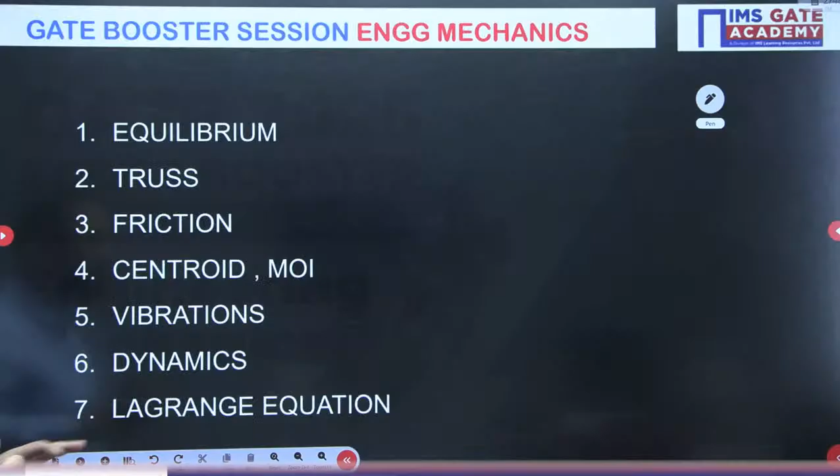Okay, we'll first look at the topics that we are going to cover here. If you see the syllabus, we have the equilibrium topic, then truss, friction, centroid and moment of inertia. Then we have vibration. Vibration is there in the civil engineering mechanics syllabus. It is there in mechanical as a different topic in the theory of machines subject, not in engineering mechanics subject. This vibration comes in civil engineering. But for mechanical students, we will already discuss it in theory of machines as well. Then dynamics and Lagrange equation.

So if I talk about civil engineering first, vibration is the most important topic, as well as the truss and friction part. Truss, friction and then vibration. Last year, if you see the questions coming from vibration, these were very good problems they asked. So if you have basic fundamental knowledge of the vibration topic, and if you have attended the class lecture live, online or offline, you will be able to solve all those vibration problems in the engineering mechanics civil engineering syllabus.

Now coming to the mechanical part, dynamics is very important, and you will see maximum questions coming from the dynamics part. But the problem is many students fail to understand which formula or relation they need to apply in the problem. So please understand, in engineering mechanics the very important part is to understand the question, to understand what kind of motion is happening. If you have understood the motion, then you can apply the equations associated with that particular motion, and you will get whatever unknown they are asking in the question. All the answers you will be able to solve.

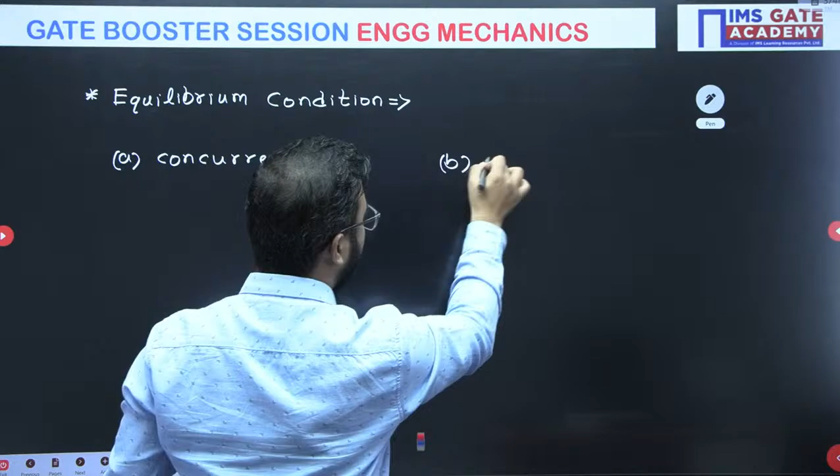So for concurrent force system - there is part A, concurrent force system, and the second part is non-concurrent force system. In concurrent force system, we have only two conditions or two equations of equilibrium. First of all, what is concurrent force system? It means the point of application of all the forces is the same. Whereas in non-concurrent force system, the point of application of all the forces is not the same. So in this case, we need to understand what kind of equations we need to apply.

So if you write here the equations: summation of forces along x direction equals 0, summation of forces along y direction equals 0 - these are the two equations. We will see the numerical for it, okay?

But before using this equation, you need to understand the force system acting on the system. If you have understood the force system is concurrent, we will use these equations of equilibrium. If the force system is non-concurrent, which means the point of application is different, we'll be using the non-concurrent force system equilibrium conditions, which is summation Fx equals 0.

First two equations are actually the same. Summation Fx equals 0, summation Fy equals 0, and summation of moment equals 0. These are the three equations we will be having.

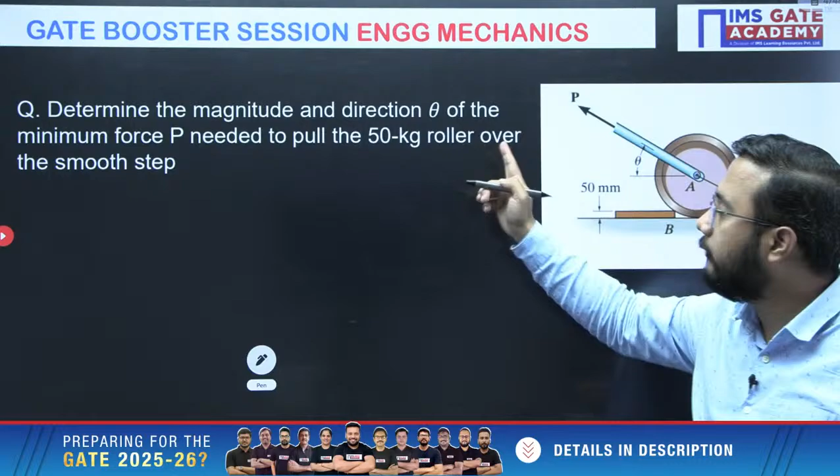This is the first problem, okay? Now what they are asking - determine the magnitude and direction. Direction means the theta value they are asking - of the minimum force P needed to pull a 50 kg roller over the smooth step. This 50 mm step is there. What is the minimum value and that direction? Direction means this theta value they are asking - what will be that theta?

Now please everyone try to solve this question and tell me your answers. I will give you 3 minutes for this particular question, and that 3 minutes is actually more than sufficient to solve this question. So you have to be very quick in solving these questions.

Everyone please try. Everyone should try this question, and please let me know your answers in the chat box. Okay, everyone should try this particular question. You might have solved such kind of questions also in your classes, so I don't think you will find it difficult to solve such questions.

The problem is theta - how to calculate that theta. For that, there is a very important concept of moment also needed to solve this particular question. So everyone please give it a try to solve this question, and please mention your answer in the chat box.

So 2 minutes left now. Just think about it, they have mentioned the minimum force P. When will the force be minimum?

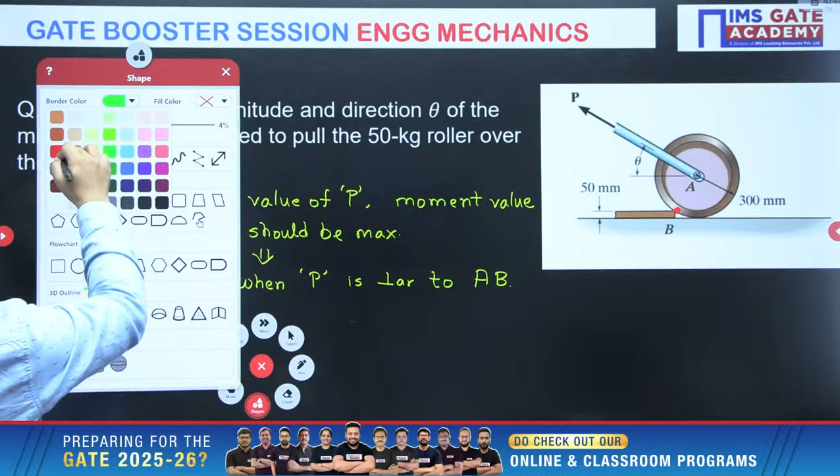Try to understand when it can have a maximum moment. When P is perpendicular to AB. AB means that distance, AB distance. Let me just draw the AB distance here for your reference, this AB distance. If P is perpendicular to AB, then only it will have a maximum moment.

Please understand, this is a very important concept here. So for having a minimum value of P, it should have a maximum moment. The moment value at B should be maximum. When will it be possible? When P is perpendicular to AB. Now we got this information that P is perpendicular to AB.

Now what do we need to do? We need to calculate the angle actually. So this is one of the dimensions. Now how to calculate this one? Please understand, very important part. First of all, let me just mark it here.

This angle is 90 degrees, right? This is horizontal, this is vertical. Let's suppose this angle is theta. This remaining angle will be 90 minus theta. Now this P is already perpendicular to AB, so this angle will be what? Theta only. I hope you are getting this point. Very important: this value is theta and this value is also theta.

Now how to get this value theta? If I am able to calculate this theta, anyhow it is equal to this theta only. So how can you calculate this part? So what we have discussed, this theta we have to calculate, and this theta is nothing but this theta only. So this theta, how can I calculate? Everyone please try to understand here.

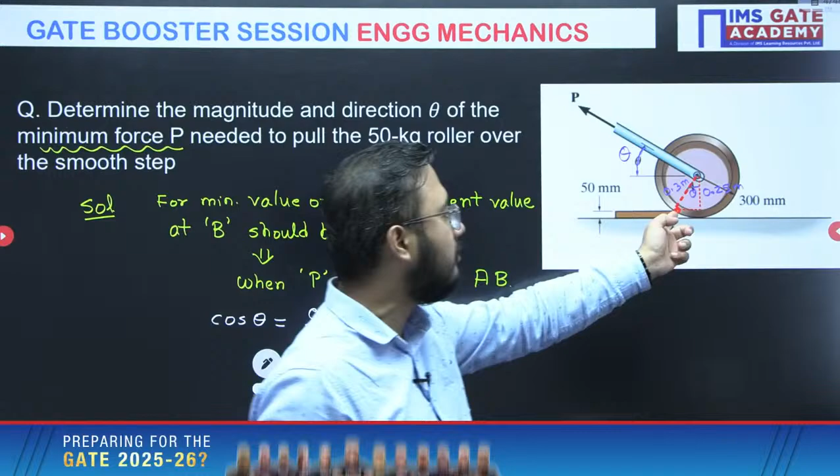This is the first part of the question. If I have solved theta value, then we can easily get the value of P as well by taking the moment at B as 0. Now, why can we take moment at B?

Because we are writing moment at B for a situation, for a moment when it is just about to roll. Just about to roll means it is on the verge of rolling. It is not actually rolling, it will be on the verge of rolling, right?

So theta value we can calculate, and once we have calculated theta, what we need to do is take the summation of moment at point B as 0. With this equation, we will get the P value as well.

How will we write the moment at B? Because of P, let us write P minimum multiplied by how much distance? 0.3, because P is perpendicular to AB distance, directly I can write. Okay, fine, P into 0.3.

Another moment will be created by the weight. This is P, the other value will be weight. Now, P is creating anti-clockwise and W will create clockwise. So clockwise and anti-clockwise moments I will consider equal for equilibrium condition.

50 kg roller they have given, so 50 into 9.81, that is weight, multiplied by this distance, because the line of action of the weight force matters.

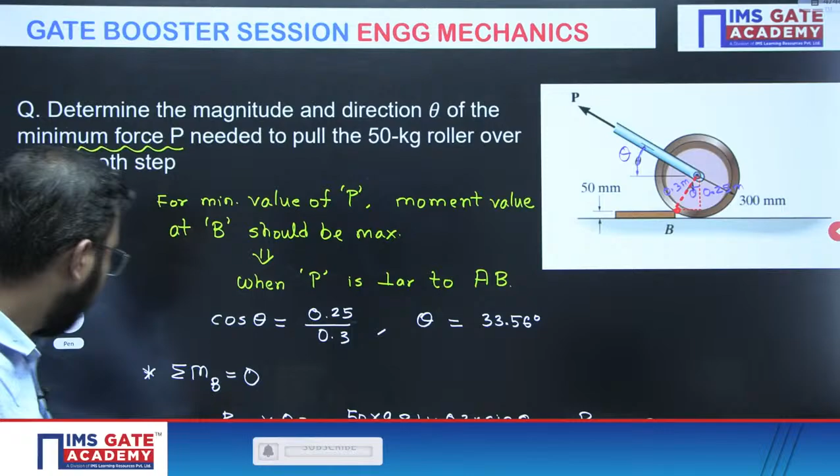Now how to solve such problems? There is a very important concept that everyone should understand. So before coming to this numerical, I will tell you one important concept here.

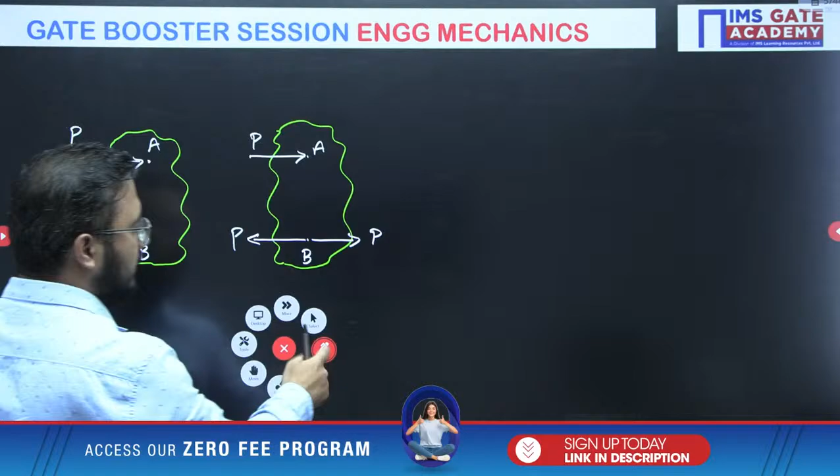But one thing you will observe: this force P and this force P will form a couple. Same magnitude, both parallel, there will be some distance between them, acting in opposite direction, so couple formation will be there.

Now see, if I remove that couple and show the couple magnitude directly here, this is force P at point B. Couple direction would be clockwise, and that couple moment value will be P into D, assuming the distance between them is D.

So what we have understood here is, if I have to transfer a force to another point, not only the force will come, but also a moment or couple value will come. Couple value means nothing but the moment. So if I transfer this force, not only the P force comes, but also that moment.

This is a very important concept. This force couple system is the equivalent force couple system of this force. Equivalent of this force system is this force couple system, and equivalent of the force couple system is this force. Vice versa, we can say.

So this condition and this condition are equivalent. Now, using this concept, we can solve this problem easily. Please understand, this is a very, very important concept.

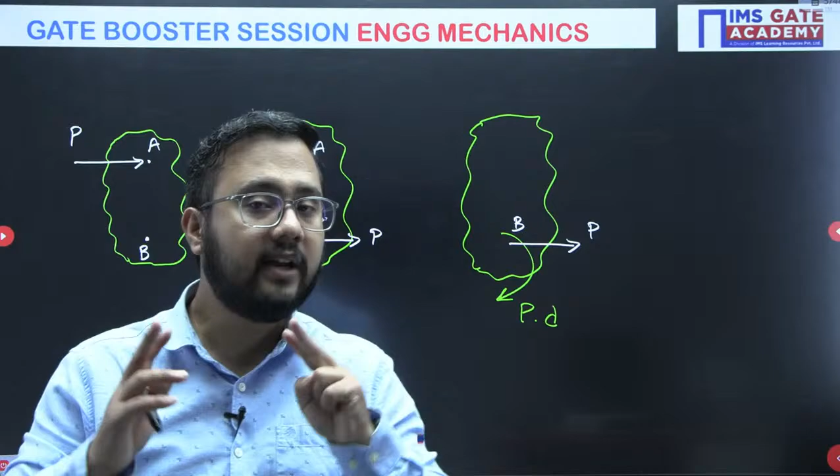This is a very important point. While transferring to point B, magnitude and direction are same, only point of application is different. Now, this particular problem, we can easily solve if you have understood this concept.

Now, everyone please try this particular problem and let me know your answers, everyone, fast. I will give you just 2 minutes, because this is a very easy problem. If you have not understood the concept, it would be difficult, but if you have understood it now, it is very easy.

You have to identify systems 1, 2, 3 and 4. Which system will give you the correct representation of the equivalent force system at point A? Out of the 4 options, which system is the correct representation of the equivalent force system at point A? So, 4 options are available. Please let me know your answers, everyone.

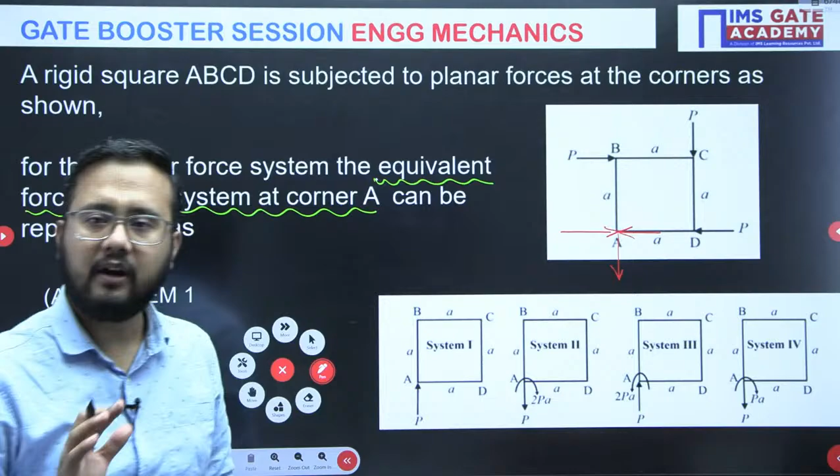Now, while transferring the forces, the moment value will also come. This P at point A will create a moment P into A, in clockwise direction. This other P at point A will also create a moment P into A, again in clockwise direction. So P into A plus P into A, that is the moment value at point A.

Now talking about the forces, this one and this one will get cancelled out. Only force will be the downward force, but the moment value is 2Pa, not Pa, Avinash. That's why you got D as the answer. D would be correct, but the problem is the moment value is wrong there.

So the correct option is system B basically, system second. System second is correct because the moment value is 2Pa and the net force value is P in the downward direction. Option B, which is system second, is the correct answer. I hope it's clear to you, Avinash, why option second is correct here. Option B is the correct answer, that is system number 2.

So no need to confuse here. Simply transfer this force, this force transferred like this, this force transferred like this, this force transferred like this, maintaining the magnitude and direction. This P cancels out, remaining P in the downward direction. This P and this P together at point A create a moment Pa plus Pa, that is 2 into Pa. So that's why option B is the correct answer here. Clear? Avinash says yes.

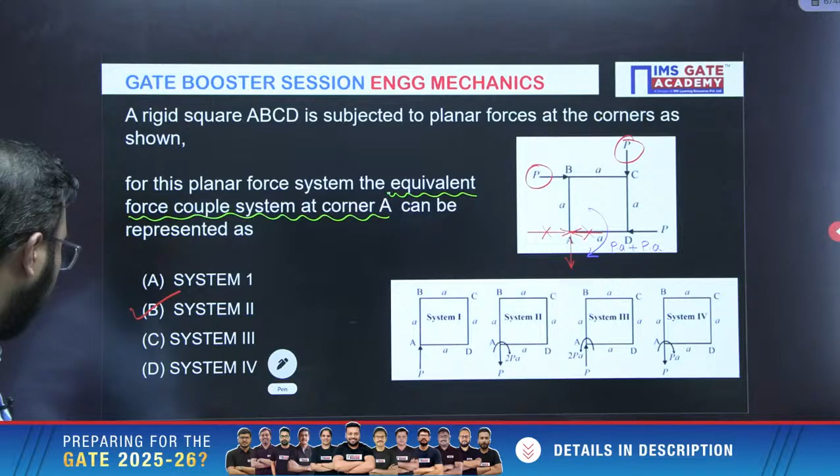Great, now coming to the next part, very important. So these are the questions we discussed from equilibrium. Now we'll move to the truss analysis part. In truss analysis, both in mechanical as well as civil, you will always find a question on zero force member. Always they ask a question about the zero force member. So we'll discuss the zero force member concept, and after that you need to tell me the answer for a zero force question.

Just a small concept, 2 cases are there. If you have understood those 2 cases, then you can easily get the answer, and we'll see how fast you are able to get it. So for the zero force concept, there are 2 cases, like case number 1.

In case number 1, what will happen? There is a joint formed by 2 members, member 1 and member 2. Let's suppose they have an angle theta between them. Remember, a joint formed by 2 members, and both are non-collinear. So what will happen? Force in member 1 and force in member 2, both are 0. What is the condition? Please remember this condition.

Condition is no load at joint and no support reaction at joint. If this condition is satisfied, then only I can say force in member 1 and 2 is zero.

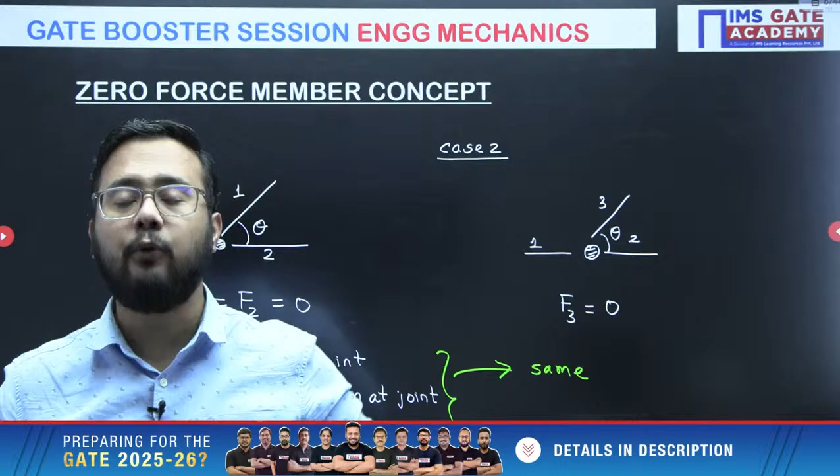And even if a question is not specifically about zero force members, that concept is still very helpful in analyzing a truss problem. Because let's suppose there is a very big, complex truss given. But in that complex truss, there are a few members which are zero force members. If you are able to identify those members, the analysis becomes much simpler. Otherwise, you will always get confused.

You might even get fear - okay, a big complex truss is given, how do I solve this? It would seem difficult. But no, it's not like that. In that big complex truss, you might find some zero force members. If you identify those zero force members, the whole analysis becomes very, very easy.

So always make sure it's not only in zero force member questions, where they ask you to calculate the number of zero force members, that this is required. No - in a simple truss analysis problem where they are asking for force in any member, this concept is also very helpful. Now let us see the problem.

A very, very good problem they have asked. Okay, so let everyone try. I will give you 3 minutes for this problem because it's really a very good problem - not that easy, but still if you try, you will get the answer. I will give you 3 minutes. Everyone please try and let me know your answer in the chat box. Avinash, you can try and please mention your answer in the chat box.

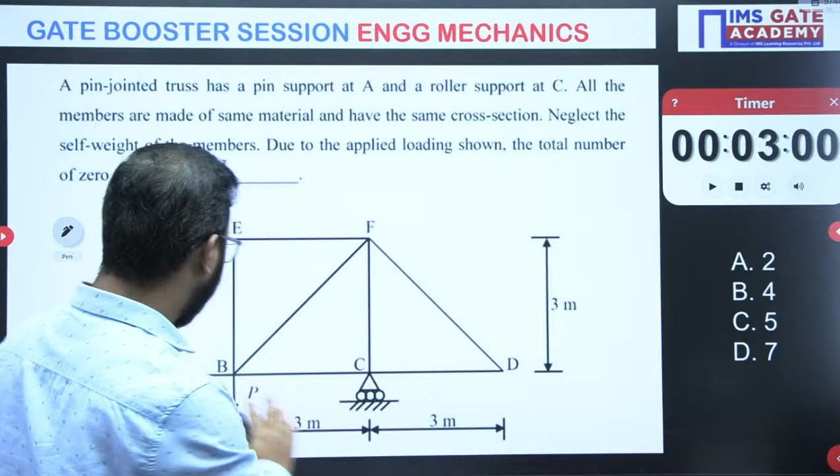Do one thing, take the moment about A. Let us write it here itself. Summation of moment at A equals zero. At C, assume there is a reaction RC. RC will have a moment about point A in the anti-clockwise direction, how much? RC into 6.

It is anti-clockwise, so minus. This P is clockwise, P into 3, so plus. The sign is up to you, whichever convention you follow: clockwise positive and anti-clockwise negative, or anti-clockwise positive and clockwise negative. So RC at A is anti-clockwise, I've used minus, RC into 6. Now P into 3, this P will have an anti-clockwise moment, so it will be minus P into 3 equals zero.

Now P into 3 plus minus, what is the RC value then? The answer is 0. RC value is coming as 0. D, yes Avinash, absolutely, option D is correct, 7 is the correct answer here. But you will get to know that 7 is the answer only if you have calculated the RC value. If you have not calculated RC value, you will never get 7 as the answer. This RC value is 0.

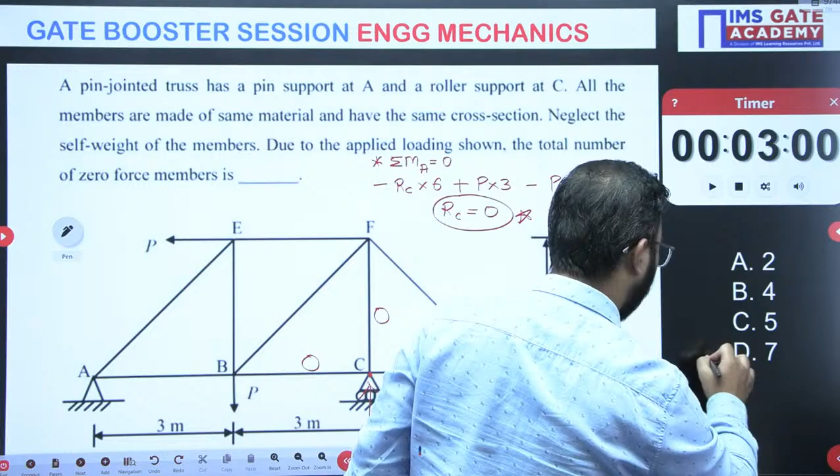Now please look at joint F also. Sometimes whenever you have confusion, please draw the diagram, then it would be very easy to understand. You should draw the free body diagram of joint F. Let me draw it here itself. So this is joint F, right? This is one member, this is another member. I have not mentioned members FC and FD because they are already 0. So this is the 2 members. Now please understand, very important part.

FC is 0, right? Is there any member? Because this is an inclined one, it will have horizontal and vertical components. But is there any vertical force or vertical member to balance the vertical component of this inclined member? There is no one present to balance the vertical component. Which inclined member am I talking about? FB. There is no one to balance it, so that inclined member has to be 0. If it is 0, then obviously this horizontal member will also be 0. So sometimes directly looking at the diagram you won't get an idea; better always draw the free body diagram. So this is 0, this is 0.

How many have we counted just now? 1, 2, 3, 4, 5, 6. 6 is not there, where is the 7th one? Can you tell me the 7th zero force member? Which member is the 7th zero force member? I have mentioned only 6 zero force members. Where is the 7th? What is your answer, Avinash, tell me. The 7th zero force member. So counting wise it is totally 6, right? Anyone? We have identified 6, but the answer is 7, so where is the 7th one? Yes, absolutely correct.

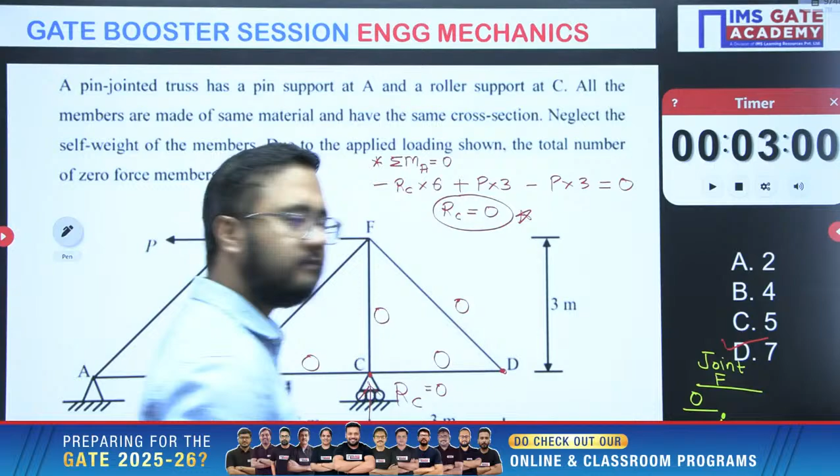Clear? So such kind of questions you can expect in the GATE examination as well, for both civil and mechanical engineering. This is a very important concept of zero force member. Now we'll see another problem, again a very important one. We have to calculate the force in member HG. Which method will you use? Obviously method of section. In truss analysis, method of section is one of the best, simplest, and easiest methods, and it takes very less time.

So please try to calculate the force in member HG, and your time starts now. Do it fast everyone, HG.

Use method of section. You have to use the method of section. For method of section, what is the first step? We will cut a truss with a section, and that section should pass through a member like HG, because that is the unknown member. Our section should pass through HG member. So I can use a section which is going to cut the truss like this. So this is the hint, this section we have to use.

Either you can use the left part of a truss or right part of a truss. It's up to you, whichever part you are comfortable with and which part you think is easy to solve. So that section we can use, two parts, left or right, it's up to you. Please do it, last 2 minutes you have. Do it fast and tell me your answers in the chat box.

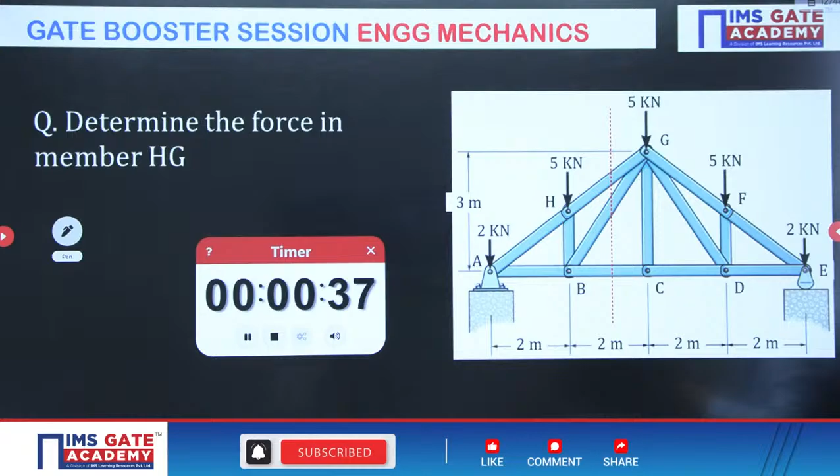Last 1 minute. Ten seconds left, everyone.

Time up. Anyone got the answer? So I think no one got the answer here. You might think it is a difficult one. See, truss problems, I'm telling you, you will always get full marks if you have a basic understanding of the force analysis part and some basic understanding of geometry as well.

Now, already I've cut a section here. That section we are going to use. But before that, I need to calculate the support reaction Ra, this is Re. How to calculate the support reactions? See, equilibrium of entire truss we will be assuming.

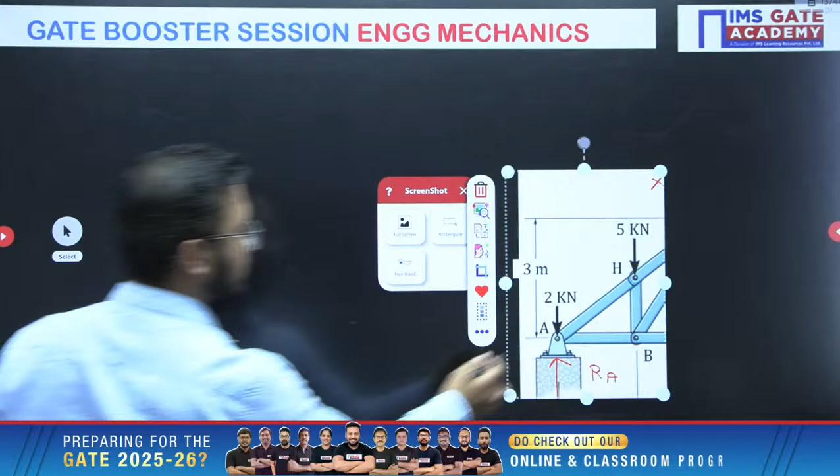Now let us mention it here, very important. This is force in member HG. This is force in member... what is this member? BG. And this is force in member BC. Is it clear? How we have mentioned the left part of a given truss.

We have used a section, cut a truss, and we have used the left part for analysis. Now, as it is a non-concurrent force system, we have only 3 options, like 3 equations of equilibrium. I hope you remember those equations we just now have written.

These are the 3 equations of equilibrium I am having.

Now, obviously if I use summation fx, I cannot use it because HG, BG and BC are the 3 unknowns. With one equation and 3 unknowns we cannot solve. Summation of forces vertical again we cannot use because Bg will be there, Hg will be there.

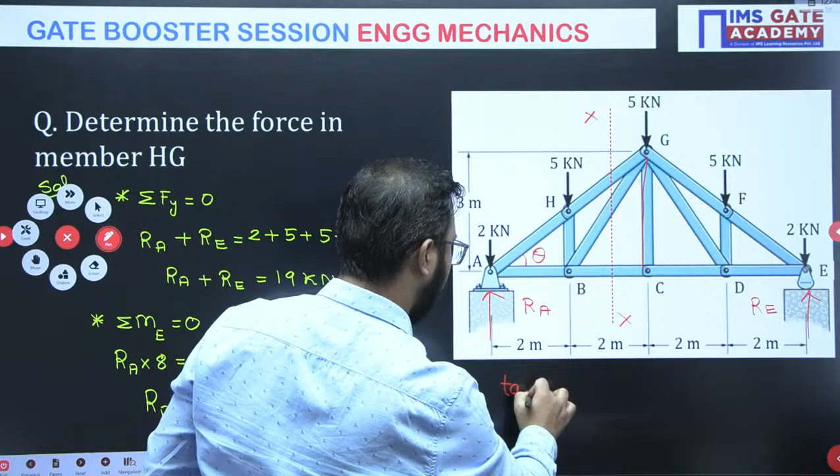That theta I can use here to get FHG cos theta. So how will I write the equation? First of all, tan theta: perpendicular is 3, base is 4.

Now everyone please see here. I am writing the moment about point B equal to 0. So the first 2 kilonewton, this 2 kilonewton, and this FHG will be having a moment value at B only. There is no other force which will have a moment. BG and BC are passing through B only, so how can they have a moment?

So we'll write this value first: 2 multiplied by distance 2, having anti-clockwise moment. RA will have a clockwise moment, so RA value is 9.5 into 2. And what about HG? It is having anti-clockwise moment, so we write minus FHG cos theta multiplied by the distance: total was 3, half will be 1.5.

Equals to 0. So this is the equation I am going to use, and from here I will get the answer for FHG.

So please first calculate the theta value, and that theta we will utilize in this equation to get the answer of FHG. Do it fast everyone.

Okay, the theta value is coming around 36.87. Theta value is 36.87 degrees. You can please cross check the answer, 36.87 degrees.

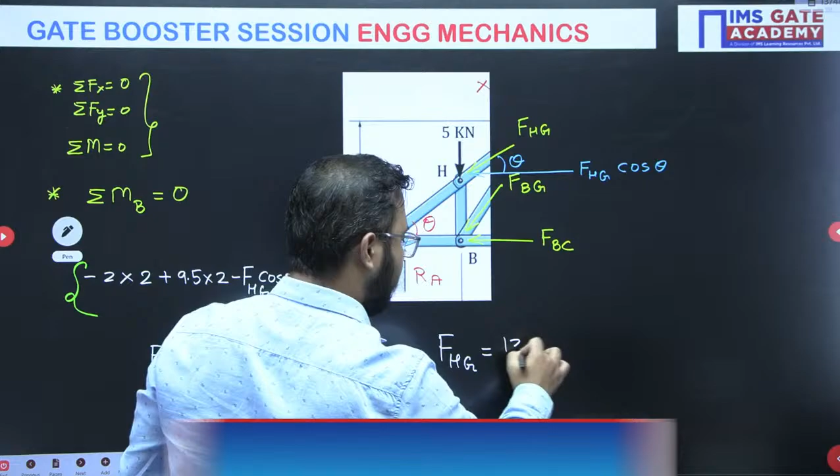I hope everyone has understood the theta value and how we have used it. We calculated the support reactions first, and then FHG's horizontal component creates a moment at B, not the vertical component. So FHG cos theta multiplied by the distance 1.5. The answer is approximately 12.5 kilonewton. Please everyone cross check this answer.

12.5 kilonewton is the correct answer for this particular question. Right everyone? Is it clear? Any confusion in any of the equations that we have used here?

So you can ask. This is again a truss analysis question, if you have understood the process, how we have to use method of section, how we will cut the truss, which equations we have to use. We have only 3 options.

One by one try all three. Okay, if summation fx is not giving answer, summation fy is not giving answer, summation of moment will give the answer. But while using summation of moment equals 0, you have to be very careful and very much clear about the point about which you have to write this equation.

It means I will select a point in such a way that other unknowns will not come into that equation. And when it will not come into that equation of moment, when they have a 0 moment about that point. So that's why intentionally I have selected B, because BG and BC moments are 0.

Otherwise, if I select point A, there will be a moment of BG and that will create a problem for me. Otherwise, how will I get the answer? So with a single equation, only one unknown you can solve. It is not possible to get the answer of more than one unknown in a single equation.

Is it clear, everyone? Great. Now moving on to the next numerical here, and that is from the friction chapter.

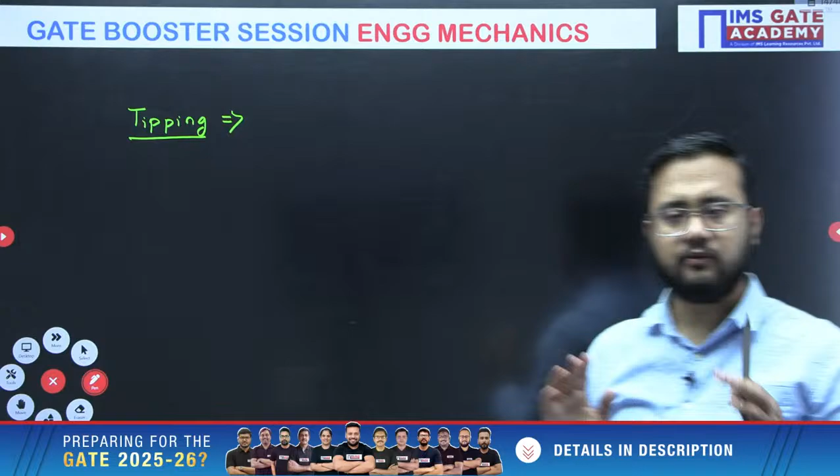So that was a very good question. You can just refer to the previous year booklet that you are having, and you will get the detailed solution there. Now, the tipping case - let us understand that tipping case here first.

Let's suppose this is the block we are having. So consider this point that I am applying a force P here. Now obviously, if I am applying a force P, there will be a tendency of the body to rotate about this point. Obviously at this corner itself, it will have a tendency to rotate.

Now it will rotate or not, that we have to understand. Under what condition it is not going to rotate, or what is the limiting condition when it will be just about to rotate or just about to tip about this corner, that we need to understand. So that limiting condition means what?

When the normal shifts to this corner - friction, so like it will be tangential, but when normal shifts to this corner, then we will call it a limiting condition. This is the limiting condition of tipping.

And what will happen in this limiting condition? The body will be just about to tip, just about to tip - on the verge of tipping, like this. So that is the limiting condition.

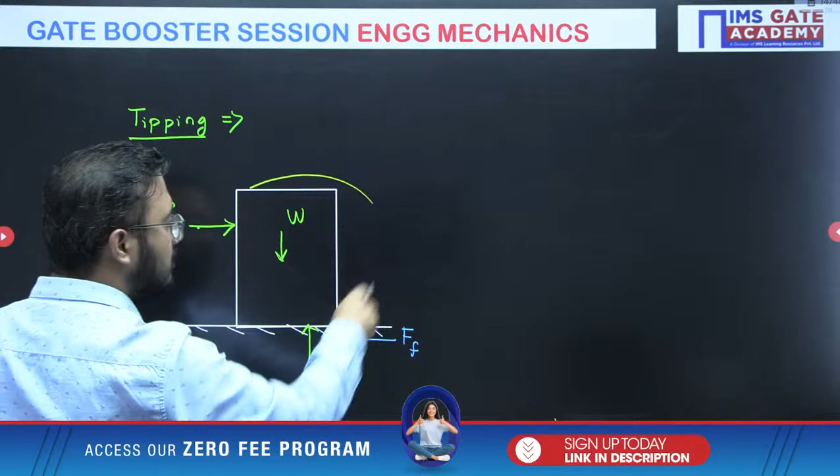This P and the friction force create a clockwise couple formation. That weight and normal will create an anti-clockwise couple formation. So that anti-clockwise couple formation from W and N is trying to oppose the tipping, but this P and friction force couple is trying to induce the tipping effect.

P and F couple formation is the reason for the tipping, but W and N couple formation tries to oppose that tipping. That's why in the limiting case, how far can it move? It can reach up to the corner only. It cannot go beyond this point. That is a very basic common point.

So what is the limiting condition? It can reach to this corner. It cannot go beyond this corner point, right? That's why the limiting condition means when the normal shifts to the corner about which the tipping is going to take place. I hope you have understood this point. This is very important.

Now coming to this question, everyone please understand. They are asking what the maximum value of height is so that it will slide without tipping. Now first of all, we need to understand the value of force for which sliding will take place.

We need to understand the force value for which sliding is going to take place. So summation of forces along the inclined plane we will take as 0. Now along the inclined plane, the very important part is to draw the free body diagram.

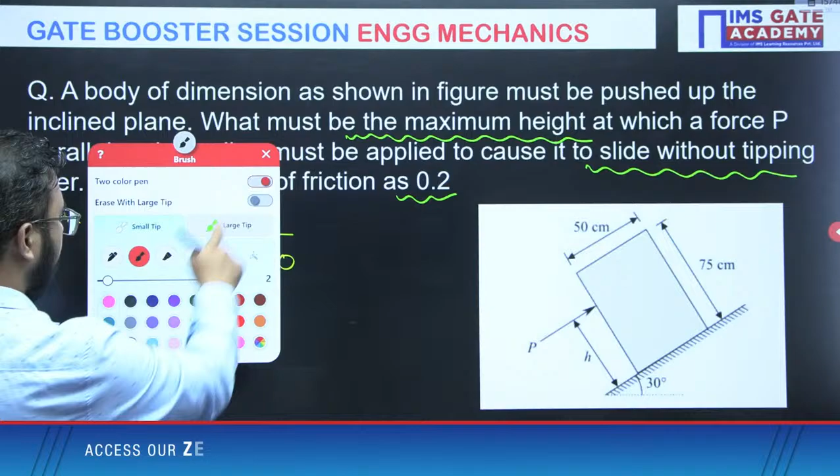The dimensions are already clear: this is 50, this is 75. Now, as I have used summation of forces along the inclined plane, so summation of forces along the inclined plane I am going to write: P minus friction force minus W sin 30.

So the P value you will have: friction force plus W sin 30. So the friction force, how do you write it? Mu into N, plus W sin 30. This is the value of P.

Now please understand, this is very very important. Tipping case, the limiting condition, maximum value of height they are asking - at what maximum height can we have so that tipping can be avoided and it can slide without tipping. Maximum height they are asking.

So maximum height basically corresponds to the situation on the verge of tipping. That's why I have assumed the limiting condition. Because as the height increases, the moment value increases here. As the height of P from this base increases, the moment value increases, and the tendency of rotation also increases with the moment value. That's why they are asking maximum height.

So we will be considering the limiting case. Now what I will do is take the moment values directly here as 0. So let us write here: summation of moment. Let us write this point as A, this is B.

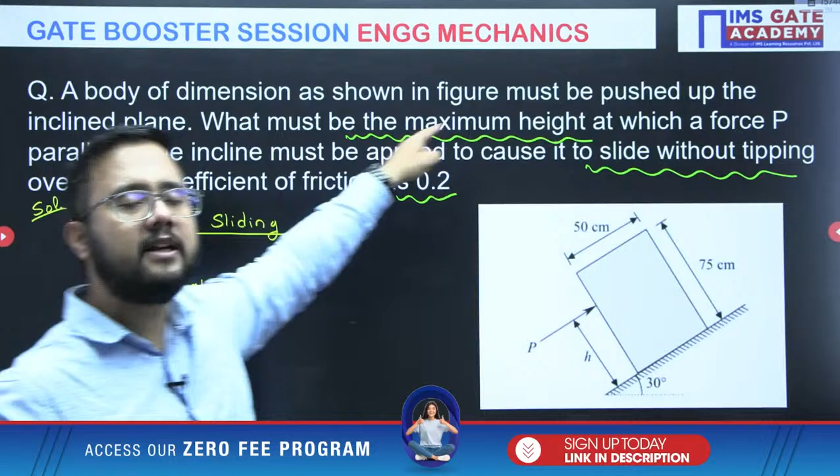Limiting condition means when the body is just about to tip or on the verge of tipping. I will understand they are talking about limiting condition because they have mentioned maximum height. What is the maximum height when tipping will not take place? So I will consider that height which will induce the tipping motion, or which will create a condition where it is on the verge of tipping. That height will only be called the maximum height, because as soon as I increase the height, the moment value will be more and it will tip for sure. It will tip.

So two types of questions they will be asking: what is the maximum height, or what is the minimum value of force? Because when they are asking the maximum height, P value will be fixed and H is variable. But if they are asking the value of force, then height will be fixed. So please understand, either they will ask maximum height, or they will ask minimum value of force P so that it can slide without tipping. That is the second type of question that can be asked from tipping.

Tipping is very important both in mechanical as well as civil. Already in mechanical it came a few years back, but in civil, recently, a very good MSQ they have asked. And that is very important, so please try to solve that PYQ also.

So if you solve all these values here, the H value you will be getting is approximately 60 centimeters as the answer. So you can cross check this answer as well, approximately 60 centimeters you will be getting as the answer here. Please confirm everyone, is it right? Everyone has done it? So 0.2 into W cos 30 plus W sin 30, into H, equals W cos 30 into 25 and W sin 30 into 37.5.

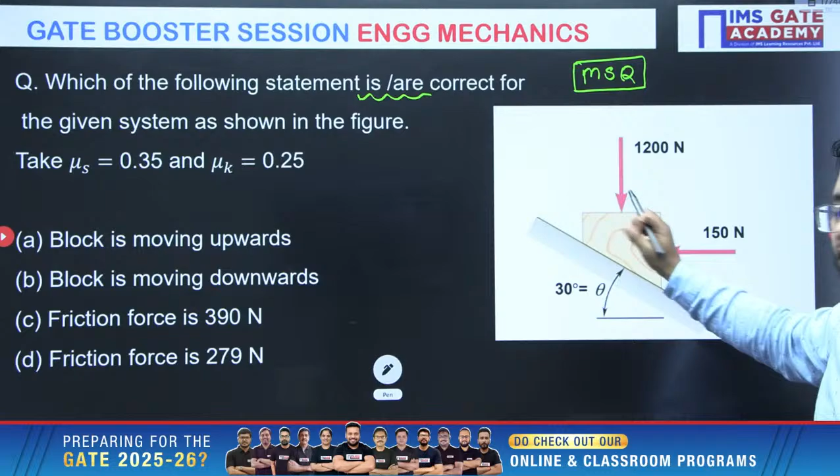Coefficient of friction - static and kinetic. There is a 1200 Newton force in the vertical direction downward, and 150 Newton in the horizontal direction towards the left. There are four options mentioned, and we have to see which options are correct: block moving upward, block moving downward, and two friction force values - 390 or 279.

Okay, fine. I need to analyze this particular system. To analyze the system, first of all, I need to understand where it has a tendency of motion. Where is the tendency of motion? How will we identify that?

Understand this basic point: obviously this block will have a tendency to move along the inclined plane itself - it will try to move in the inclined plane. So I need to know whether it is trying to move upward or downward. How to decide? I need to calculate the net value of the force on the block along the inclined plane, and then only I can understand. If the net force is acting downward, it will move downward; if the net force value is in the upward direction, it will move upward.

So that is the first thing, because the tendency of motion is required so that I can understand the direction of friction force. Clear, everyone? So let us mention the directions here. Better I will draw the free body diagram, and then it would be easy for you to understand also. So this is the body we are having, and along the inclined plane, this is the direction.

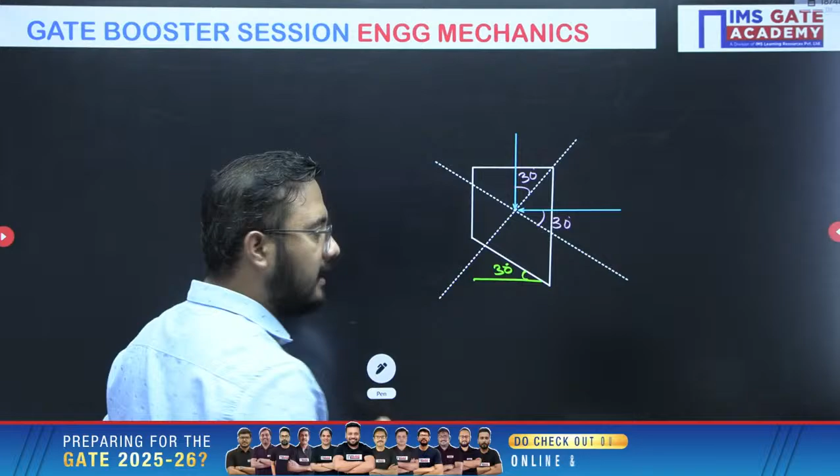Because the inclination is 30 degrees, obviously this one will also be 30 degrees. The inclination of this inclined plane from the horizontal is 30 degrees, so this one is also 30 degrees. Okay, fine, this is clear. And one more thing - this is the perpendicular direction, perpendicular to the inclined plane. Perpendicular to the inclined plane and vertical direction always have theta, that is the inclination angle. So this angle is also theta, 30 degrees. This one also is 30 degrees. Like that we have identified the angles as well.

Correct? Now this was 150 Newton and this was 1200 Newton. Now let us take the components along the inclined plane. So this is 150 cos 30. This will be 1200 cos 30, but this one is 1200 sin 30, and its perpendicular component here, perpendicular to the inclined plane, plus I should write 150 sin 30. Okay, like this - so we have mentioned the forces as well.

Fine, now where will be the tendency of motion? Obviously I can say 1200 sin 30 is 600, and that value will be more than 150 cos 30. So it has a tendency to move in the downward direction. So we can write here: 1200 sin 30 is greater than 150 cos 30. So the block will have a tendency to move downward.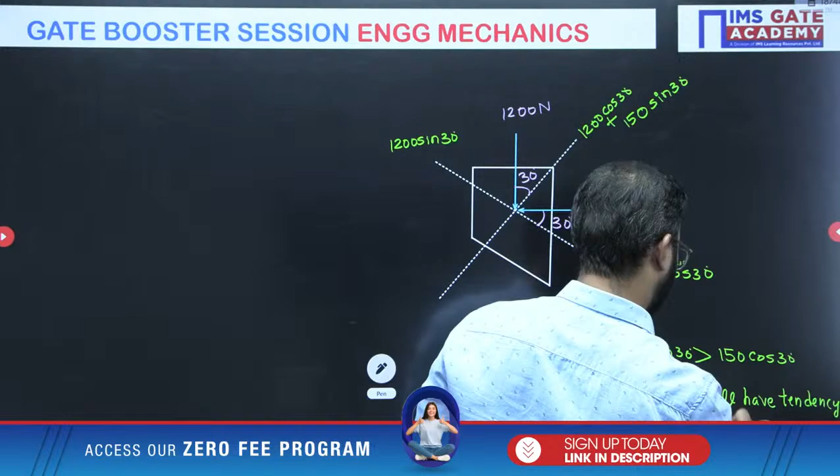Tendency to move downward. So block will have tendency to move downward because 1200 sin 30 is downward, greater compared to 150 cos 30.

Now the friction force. Let us mention the friction force values. This is the friction force that will act upward, and that is the normal force. Friction force upward because the tendency was in the downward direction. So friction force will oppose that tendency and the normal force is there. Is it clear everyone? Correct?

Now, what I will do, I will calculate the value of friction force required so that it will remain in static condition. I am assuming this because if you see the options, they are saying moving upward or downward, or the friction force - what will happen? It will remain stationary or it will move upward or downward, I don't know. I will assume the body to be under equilibrium condition.

Body to be under equilibrium condition, and for having that equilibrium condition, what is the friction force value required? So required value of friction force I will calculate. So I am writing here assuming equilibrium. Assuming equilibrium condition. Please see.

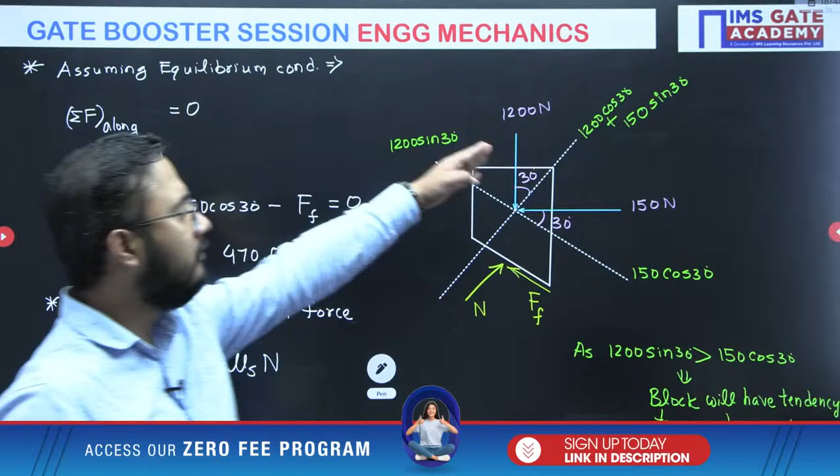Maximum possible friction force. Maximum value of friction force possible. Maximum value of friction force is nothing but mu s into n. What is n? N is 1200 cos 30 plus 150 sin 30. So summation of forces perpendicular to the inclined plane, you will take it as 0. N value will be equal to this summation only. So that we can write it here itself.

So that mu s value, what is the mu s value? In the question they have given us 0.35, into n. N value is 1200 cos 30 plus 150 sin 30. So you will get the answer of friction force. Maximum value of friction force you will be getting here. Is it clear, everyone? Maximum value of friction force you will be getting like this.

Okay, so how we got the value of n? Let us write it here itself. Summation of forces perpendicular to inclined plane. So that n equals to 1200 cos 30 plus 150 sin 30.

Okay, that value we have substituted. Maximum value of friction force you will be getting. So if you calculate the maximum value of friction force, just calculate this 1200 into cos 30 plus 150 into sin 30. That is what the value of n, then multiplied by 0.35. It is 389.98. You can consider it as approximately 390 Newton.

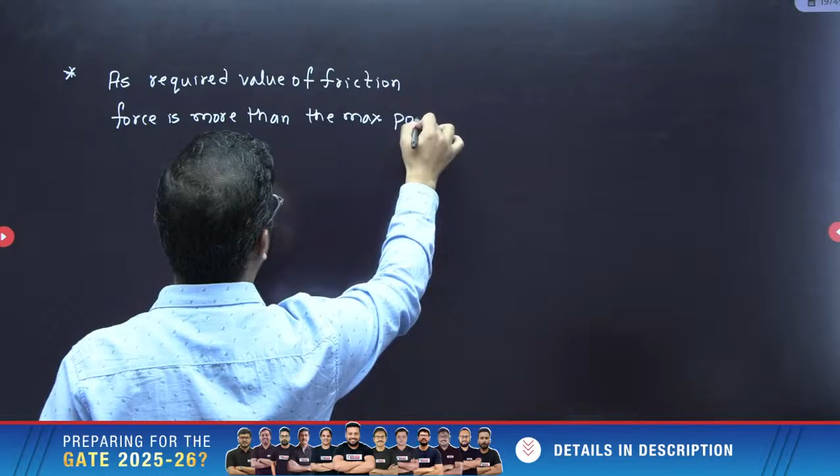As required value of friction force is more than the maximum possible value of friction force...

So as required value of friction force is more than the maximum possible friction force, the body is under dynamic condition. It cannot be under equilibrium condition. It is under dynamic condition.

And for dynamic condition, friction force we will call dynamic friction force, which is mu k into n. Mu k value in the question is given as 0.25, into n value. N we have already written as 1200 cos 30 plus 150 sin 30. Like this we have to write.

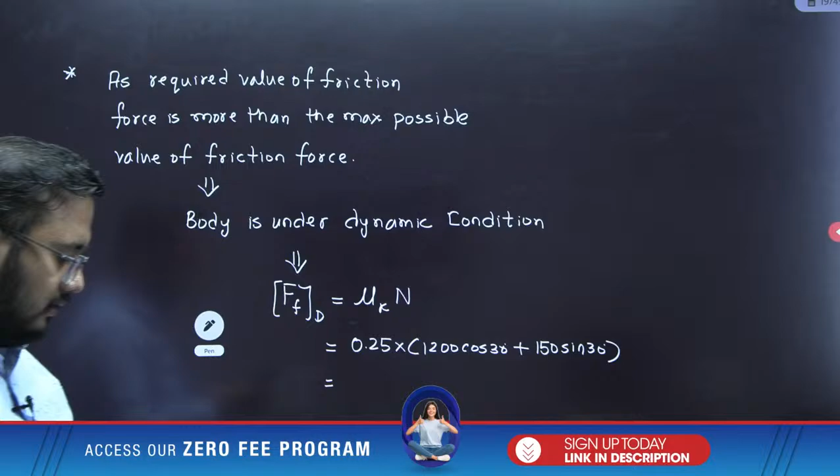So if you just calculate this, 1200 into cos 30, then we have 150 into sin 30, into 0.25 finally. So approximately 278.55 Newton is coming. So this is the actual friction force which is acting in this particular condition.

So if you look at the options here, body is moving downward. Friction force is not 390 Newton, friction is 279. Why is the friction not 390 Newton? Because that is the maximum value of friction force, it is not the actual value.

Actual value, how will we get it? First we understood it is under dynamic condition. Once it is under dynamic condition, friction force is calculated by mu k into n, not mu s into n. I hope this part is also clear to everyone.

This is a very good question they have mentioned here. Such kind of MSQs you can expect in your GATE examination as well, and they are very, very important. You will be able to solve them only if your fundamentals and basics are clear. Otherwise you will get confused whether it will move up or downward.

First understand the motion here. The body will always move along this direction. So in this direction, what is the value of net force? We have to understand whether it is upward along the incline or downward along the incline. Accordingly, I will understand the tendency of motion. Once tendency of motion is understood, the friction force direction we can easily mention, because friction force will always oppose the tendency of motion.

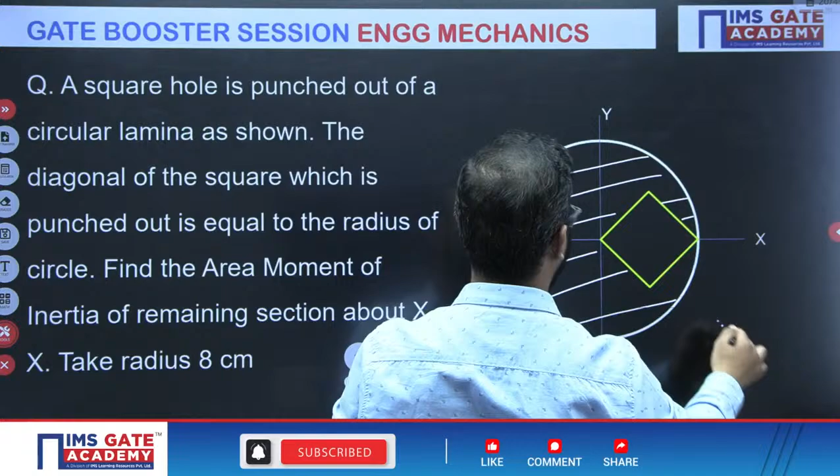Now how will we do this problem? Let us take the diagram in the next page also. Now please everyone see here how we will solve this one.

So about XX, what I will be doing first is area moment of inertia of circle minus area moment of inertia of a square section. Area moment of inertia of circle minus area moment of inertia of square, because again circle is about XX only.

About xx axis, moment of inertia equals circle moment of inertia, pi by 64 d to the power 4. What is d? Radius they have given is 8, so diameter will be 16 to the power 4, minus...

How to calculate area moment of inertia of the square about its diagonal? What I can do is calculate the area moment of inertia of this triangle and multiply by twice. So area moment of inertia of a triangle about its base, multiplied by 2, I will get the total area moment of inertia of the square about xx direction, very easily.

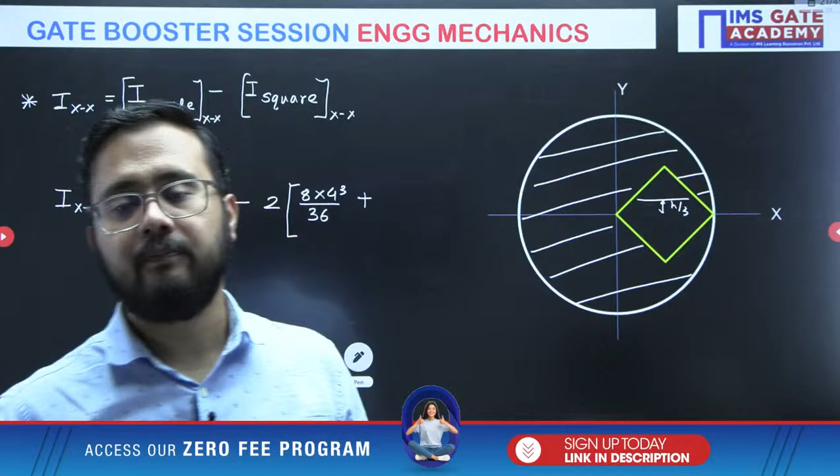Now for a triangle, BH cube, B is 8 here, H will be 4, so BH cube by 36. Actually we have to use the parallel axis theorem, because BH cube by 36 is about its centroidal axis, and the centroidal axis is h by 3 distance from the base. So we have to use the parallel axis theorem, right?

If I have to use parallel axis theorem, area of triangle will be half base into height, 8 into 4, that is area, into height 4 by 3, h by 3 from base, square like this. So using parallel axis theorem we have written this relation.

Now you can easily solve. Using parallel axis theorem, correct, you can get this answer. Just put the values, you can calculate, you will get the answer. So please let me know your answer.

Avinash, what will be the answer here? Tell me, the basic calculations you can do, no? So tell me your answer. About xx axis, what will be the answer here after solving this one?

This is basic mathematics, no? So this calculation you can perform very easily. I don't think that will be a difficult task for you. You have to be habitual of using the virtual calculator. If you are using the physical calculator, it would be very difficult for you in the GATE examination. Right now also you should use the virtual calculator, wherever and whenever you are practicing.

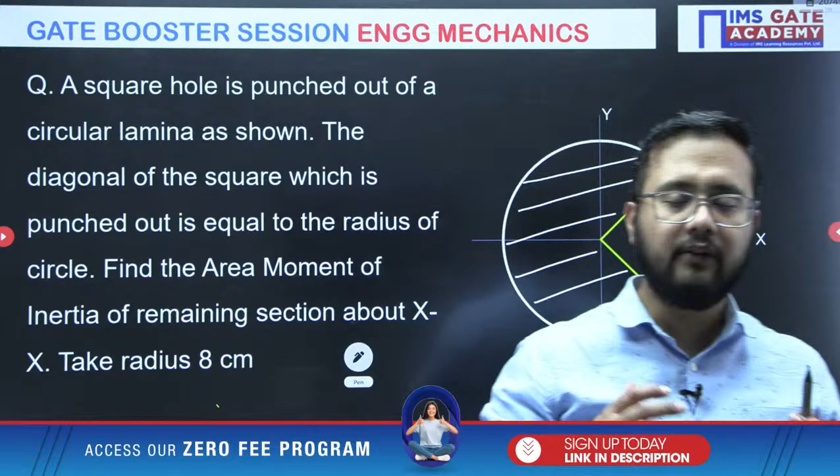Don't write the entire equation in the calculator itself. Like let's suppose this I have to calculate, don't write this part, then minus this part, plus this part, because chances of mistakes will be there. Even if one bracket is missed or something happened, the whole answer will get wrong, even if you know the concept and everything about the question.

Better thing is: calculate this part separately, calculate this part separately, calculate this part separately, and then solve. Don't take unnecessary risk of getting the wrong answer during calculation using the virtual calculator. It's my sincere advice to everyone, please understand. Better you take 10-20 seconds more in solving the question, but at least you should not get the wrong answer.

For those questions where you know everything and would get the right answer, silly calculation mistakes using the virtual calculator make you get the wrong answer, and the whole effort you put in to solve the question will go waste. That should not happen, right? So use the calculator part-wise, calculate this part and this part separately, then add all those things together.

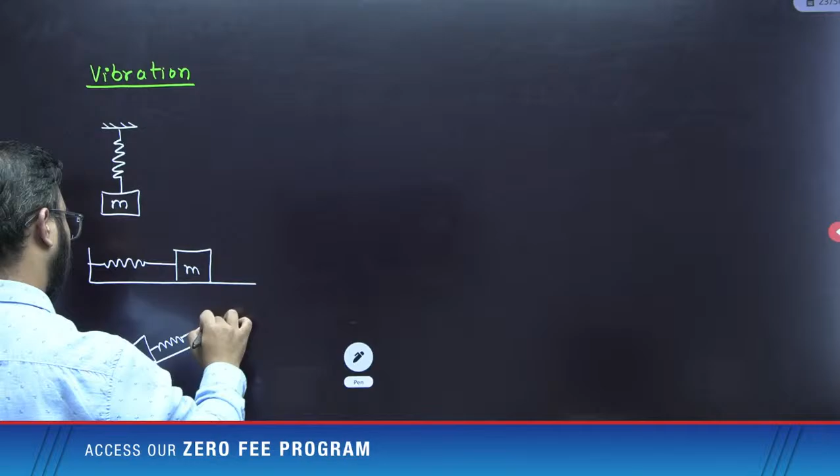Okay, in the vibration part, what you need to understand is for a spring mass system, whether this kind of spring mass system, or if it is like this, or if it is like this, in all three cases the natural frequency formula is under root k by m.

What is k? K is the equivalent stiffness, and k value has to be in Newton per meter. Mass should be in kg. Take care of this unit, otherwise sometimes they will give the value of k in kilonewton per meter, Newton per centimeter, Newton per mm, like that. You have to convert it back into SI unit, that is Newton per meter. That is omega n, unit is radian per second.

Another way of writing natural frequency is in hertz, which is omega n by 2 pi, and the unit is hertz. What do you mean by this hertz? It is the number of cycles per unit time. Number of cycles of oscillation or vibration, how many cycles of vibration or oscillation happening per unit time. That is what Fn will tell you.

And there is one more parameter, that is time period, which is 1 upon Fn, and the unit is second. So it will tell how much time will be taken to complete one cycle. Remember these things: time taken to complete one cycle.

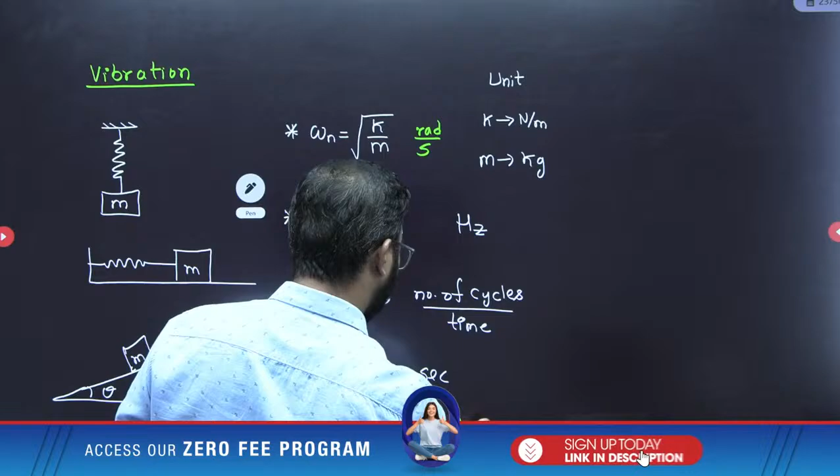These are the formulas that you need to remember. Apart from that, series combination of your springs. So how you will write the equivalent stiffness. For example, I will draw the diagram here also. So 1 upon K equivalent stiffness...

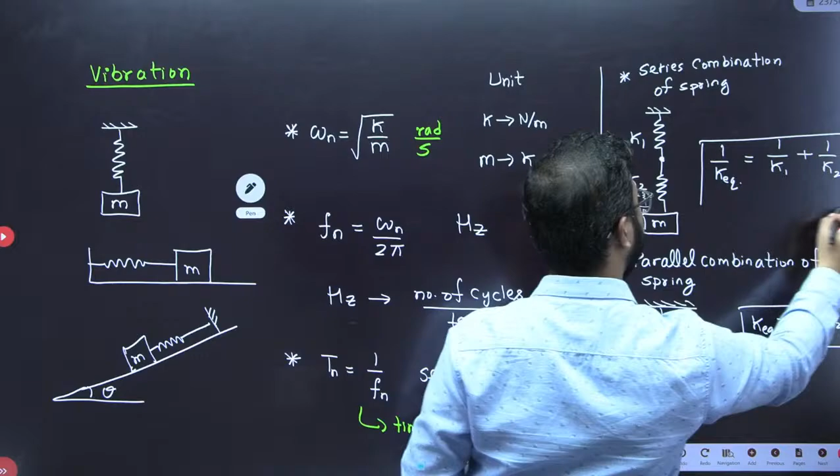Then we have parallel combination of springs, K1, K2. In this case, equivalent stiffness will be nothing but the addition of the stiffness itself. So these are the basic details, at least you should know. Then you can easily solve the vibration problems very easily.

So what happens in parallel combination? The deflection value is same for all the springs. In series case, deflection of all individual springs will get added, and the total deflection will be the deflection of the system mass. In parallel combination, deflection is same. How to identify whether it is series or parallel? If the deflection is same for all the springs, it is a parallel combination case. Very simple, right?

Now coming to the dynamics part, guys, very very important. Let us write it here itself, the dynamics. So there are few formulas or relations that we'll be having, and we will write it in a very short concise manner. If you know those formulas, if you have an idea about them, you can solve any problem of mechanics. Very limited formulas we are having, very very limited formulas, right?

For example, dynamics has two parts: kinematics and kinetics. First I will talk about kinematics part. In kinematics we have three types of motion, because in kinematics we will talk about motion only: translation, rotation, and then T plus R types of motion, correct?

Rectilinear translation case, please understand. The rectilinear translation means motion along a straight line. So there are three fundamental equations that we need to remember: V equals to ds by dt for velocity, dv by dt for acceleration, and a ds equals to v dv. These are the three fundamental equations of motion for the rectilinear translation case.

Simple. Now, if I talk about the curvilinear translation, two important acceleration components we need to know. Okay, curvilinear, simple curvilinear translation case. Tangential component of acceleration formula is R alpha, meter per second square. And another one is normal component of acceleration, r omega square, or we can write v square by r. That is normal component of acceleration.

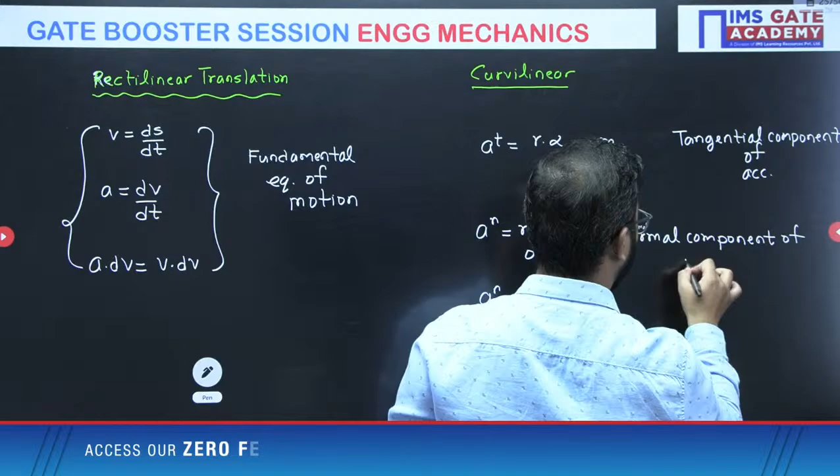Normal component of acceleration. Tangential component of acceleration represents the rate of change of magnitude of velocity, and normal component of acceleration represents rate of change of direction of velocity. So whenever direction changes, normal component of acceleration always exists. Tangential component of acceleration will be there whenever there is change in the magnitude. Magnitude changing, tangential will come. If direction changing, normal will come. So these two components of acceleration you should always remember, right?

So for example, a particle or any body is having this curved path. Tangent direction will be there. In this direction, tangential velocity will be there, as well as tangential acceleration. This is the center of curvature. Towards the center of curvature, we have the normal acceleration direction, that is fixed, always.

But if I talk about tangential component of acceleration, it will be along the tangential velocity only if magnitude is increasing. If magnitude of tangential velocity is decreasing, in that case tangential acceleration will be opposite to the tangential velocity. That's it.

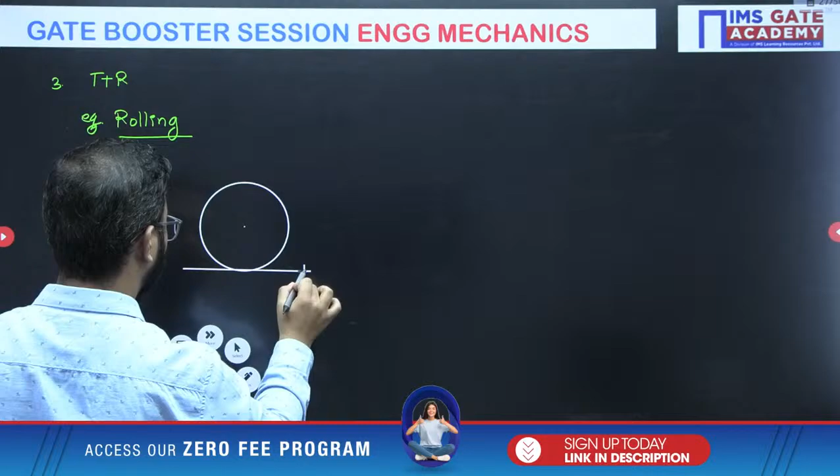We'll solve a very important numerical from rolling, so some basic details you should always remember. It is under rotation as well as translation. In pure rolling case, velocity of center of mass is r omega, and acceleration of center of mass is r alpha. This is the information we should remember for pure rolling case, or rolling without any slipping, which is actually called pure rolling.

Right, now coming to the next part. Before going to that numerical, kinetics formulas are very very important, and you should remember entire kinetics is based on Newton's second law. First we will write formulas for the linear motion case, and on the next side we will write the rotation case.

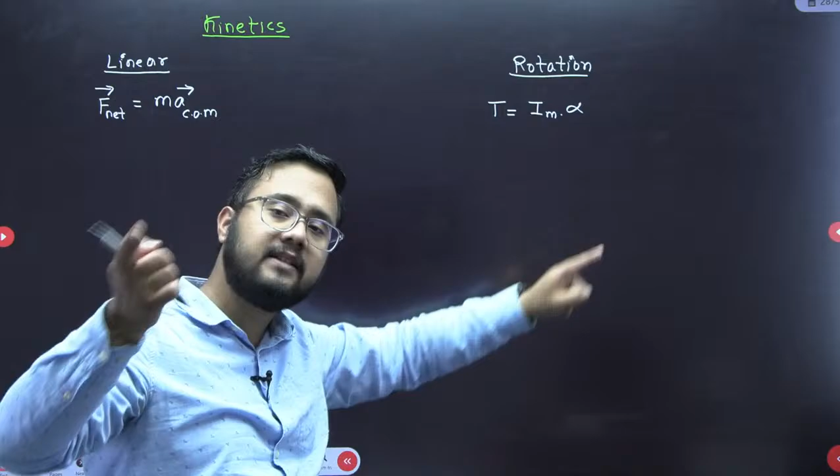Linear case: net value of force equals mass into acceleration. Acceleration will be in the direction of net force, and that acceleration belongs to center of mass. In the rotation case, torque value equals mass moment of inertia into alpha. Mass moment of inertia and torque should be taken about the same point. Keep in mind that torque and mass moment of inertia are taken about the same point. This is very important - many times the mistake will be done here itself. Wherever we are writing torque, about the same point I should write mass moment of inertia in the equation. So that is the first relation.

Second, work energy principle. Work done in linear case: net force into displacement equals change in kinetic energy. Kinetic energy means linear kinetic energy, that will be half m v final square minus half m v initial square. That's how we write work done in case of linear motion.

Now in the rotation case, net torque value or net moment - sometimes you can use moment and torque also, there is no problem in that - net torque multiplied by theta value equals change in kinetic energy, but kinetic energy here means rotational kinetic energy: half I omega final square minus half I omega initial square.

Then next thing we have is linear impulse momentum equation and angular impulse momentum equation. Linear impulse is net force value for small time period dt from 0 to t, that is linear impulse, equals change in momentum: mv final minus mv initial.

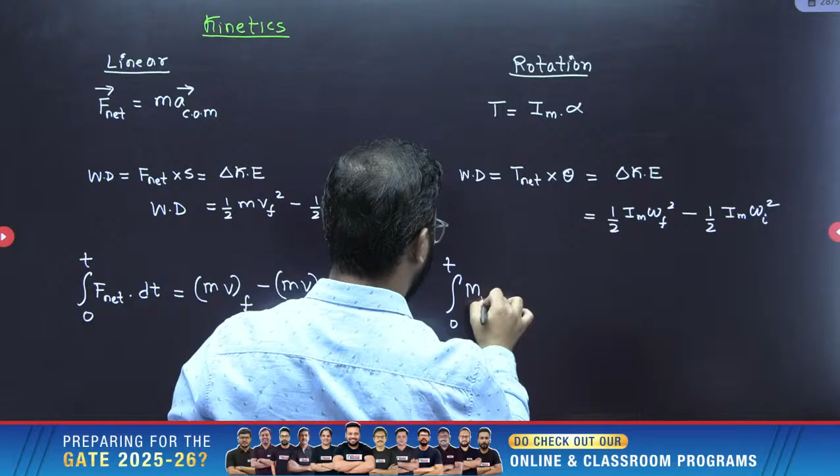Now here, 0 to t net value of the torque or the moment - let us keep it as torque only, dt. Don't be confused with t and t, so better write m here instead of torque since you might get confused. This dt gives change in angular momentum.

So this value - what is this value? This is the linear impulse, and that is the angular impulse. This is called linear impulse, and this is called angular impulse.

Correct. These are the formulas that we need to keep in mind. So these formulas we have written here. The entire kinetics of particle and rigid body has this much formula only. And one more important formula regarding angular momentum you should write.

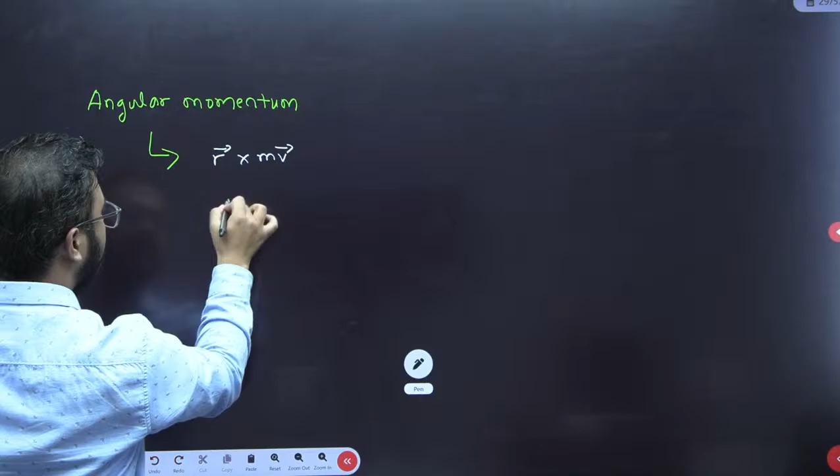So r cross mv I am using for the particle, and for rigid body I will be using this formula. So both the formulas are correct. Actually I omega came from r cross mv only.

From r cross mv only I omega came. The complete derivation, if you see, for I omega it came from r cross mv only. So cross product of r and mv. R is position vector, mv is linear momentum. So angular momentum is also called moment of momentum. Is it clear, everyone?

Now coming to the numericals part. This is one of the best problems you can see in dynamics, and you can expect such kind of questions will come in your GATE examination as well. So please everyone try this one, and I will give you 3 minutes for this particular question.

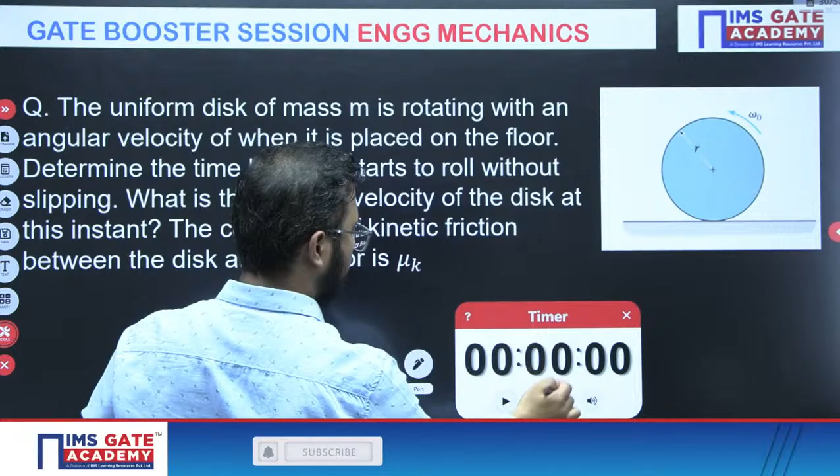Do it everyone fast. Last 40 seconds you have.

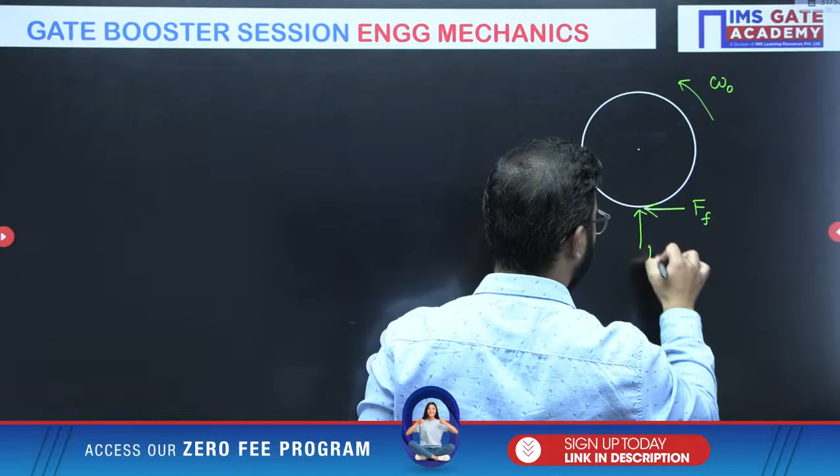Now, anticlockwise sense of rotation is there. So, tell me one thing: this point will try to move towards the right direction. So the friction force will apply. In which direction friction force will apply? Friction force will be applied in this direction. And that will be our normal reaction, that will be the weight, which is mg. Clear? That is the free body diagram.

One by one we'll apply equations of motion. Because it is a case of rolling, translation and rotation both will be happening simultaneously. For the translation case, summation of force equals mass into acceleration. For the rotation case, summation of moment or torque equals I alpha. That's how we will apply the equation of motion. So what I told you, you have to understand and visualize the motion, then associated with that motion write the equations.

Equations of motion: for translation, summation of force equals mass into acceleration. Only horizontal force is friction force, which equals mass into acceleration. Friction force will be mu into normal force, that is mg actually. So this mass gets cancelled out, and acceleration value equals mu g. This x direction acceleration is mu g.

Clear? Fine. Now another equation that we have is the torque equation. Summation of moment or torque equals I alpha. The torque value we will write about the center. So about the center, this friction force multiplied by radius. Please understand, this friction force at the center we have to multiply with radius to get the torque or moment value.

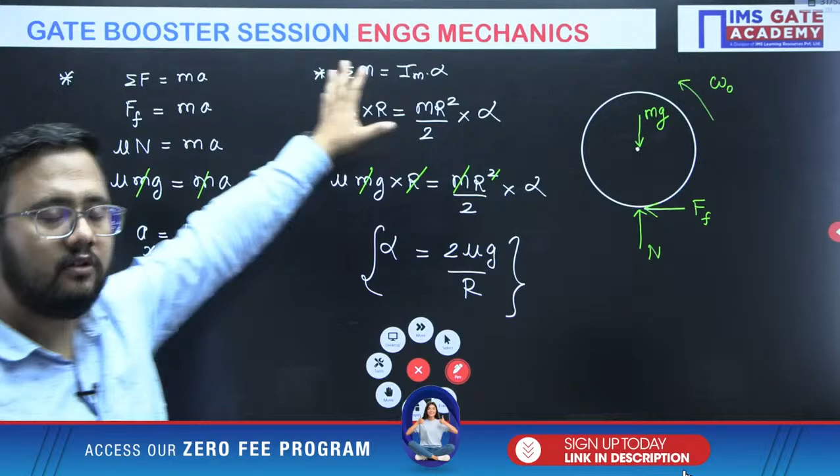So mr square by 2 into alpha. This m gets cancelled out, this r gets cancelled out. So alpha value will be 2 mu g by r, that is 2 multiplied by mu g divided by r. That is the angular acceleration relation we have solved. Summation of forces equals ma, summation of moment equals I alpha - we have applied both translation and rotation equations.

Now see, you have to read a very important point here: determine the time before it starts to roll without slipping. That is rolling motion, pure rolling motion. When will it happen? When the center point will have r omega velocity, only at that particular moment it will have rolling motion, right? So assuming the instant at time t this particular disk starts rolling.

Disk starts rolling. At time t, disk starts rolling. So we have written this point. Okay, understood.

So velocity of center of mass equals to r omega. That is the formula we have. That is the formula we are having now. Velocity of center of mass equals to r omega.

Now what we will be doing? We will apply the equation of motion. We already have an acceleration a. So v equals to v naught plus acceleration times t. According to the given situation, is there any initial translation velocity given? According to the information given in the question, is there any initial linear velocity they have given? No. What will be the value of v naught? It would be 0.

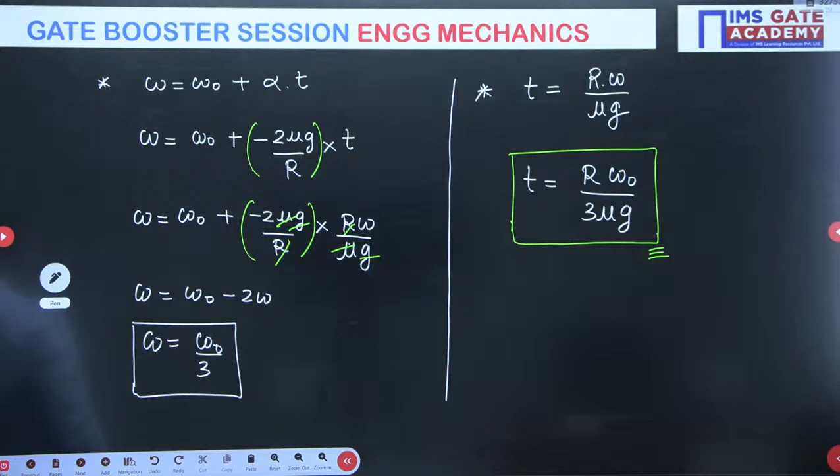Clear everyone? So please make a note of this one. This is really a very important problem that we have discussed just now.

Okay, now we'll move to the next one also. Next question, this one. I will give you 3 minutes for this particular question.

Start solving everyone. They are asking the acceleration of the center of mass, when there will be a pure rolling motion, that is without any slipping. Rolling happening without slipping is nothing but pure rolling motion.

Do it fast everyone, last 2 minutes you are having. Do it fast everyone. What will be the acceleration value of the center of mass?

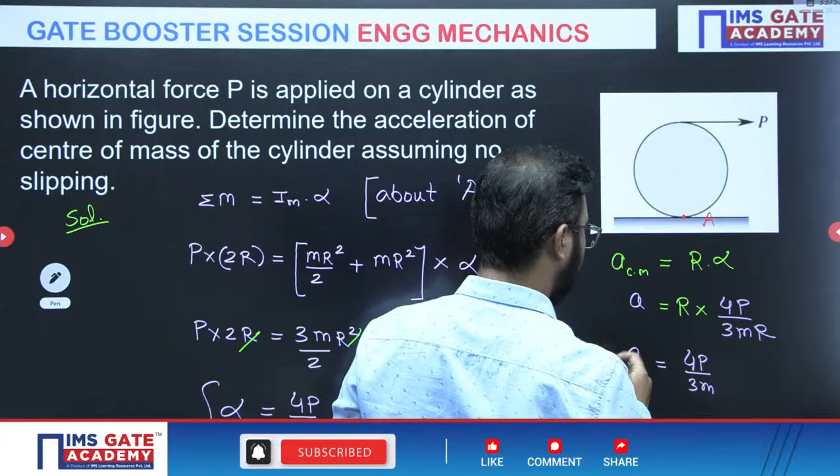Alpha value, alpha means what? 4P, that we have calculated, 4P by 3mr. Right, so the final answer will be 4P by 3m. This is what we will get as an answer here. 4P by 3m, okay, R and R will get cancelled out. So 4P by 3m is the linear acceleration of the center of mass, meter per second square. So center of mass acceleration, it is there.

Is that clear everyone? Basic problem, right? Understood. So torque equation, how we have to apply, that point is very, very important here. Now next one.

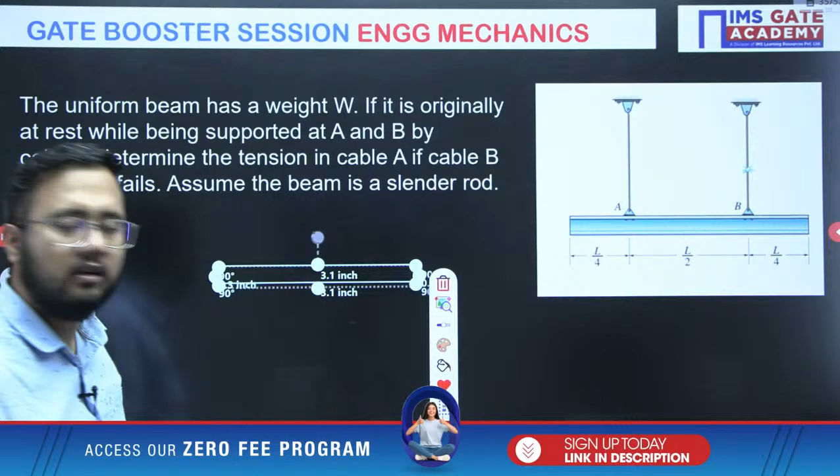First of all, the free body diagram. All engineering mechanics problems will become easy for you if you draw a correct free body diagram and understand what kind of forces are acting on it, and accordingly write equations of motion. You will easily get the answer.

Now, at point A, tension TA will be there. This is the center point where the weight will be acting. Distance from point A to the center point C will be L by 4, because L by 4 distance is also there from point A. So from center to extreme end it would be L by 4 plus L by 4, that is L by 2, correct. So center point L by 4 is there, tension TA. This is the free body diagram.

Why will tension TB not be there? Obviously because it has been cut, so why would the tension be there after that? Correct. Now apply the equation of motion here.

First of all, summation of forces vertical equals mass into acceleration. Vertical, obviously: W minus tension equals mass into acceleration. So this is the first equation we have. Correct? This is the first equation.

Now the second equation. As it is connected here and the weight is acting, it will have a torque at point A, and it will start rotating about point A also. So we can write the torque equation. About which point are we writing? About A. So about A, what is the torque? W into L by 4.

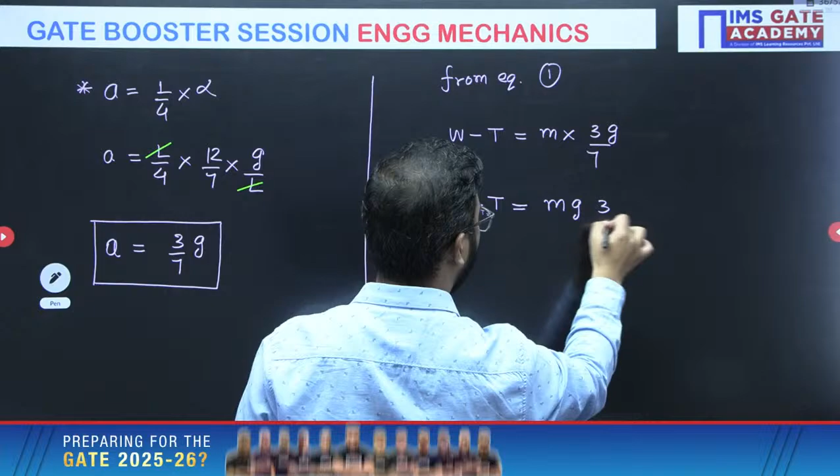Now we will substitute this value of acceleration in equation 1. So from equation 1, we write W minus tension T equals mass into acceleration, which is 3G by 7. Now, M into G is nothing but W, so W minus tension T equals W times 3 by 7. So tension equals W minus 3 by 7 W, which gives 4W by 7. That is the answer - this is the value of the tension here.

4W by 7, that is the answer here. I hope the solution is clear to everyone.

This is a very important question, the second most important question of the entire session. Although all questions are important, if you ask priority wise, this is second most important.

So the answer here is 4 by 7 W. Tension value is 4 by 7 W. Again, I am telling these questions are not tough if you have understood the motion.

As soon as this has been cut, what will happen to this rod or beam? It will rotate. What are the forces? Tension T upward, W downward direction. Linear equation I will write.

Summation of forces vertical equals to mass into acceleration. Downward force W, upward force tension equals to mass into acceleration. Simple. Net forces equals to mass into acceleration. That is what Newton's second law for linear motion. Are you getting the point?

For rotation, why will the rotation happen? Because there is a point about which it will start rotating. What is the torque responsible? W into L by 4.

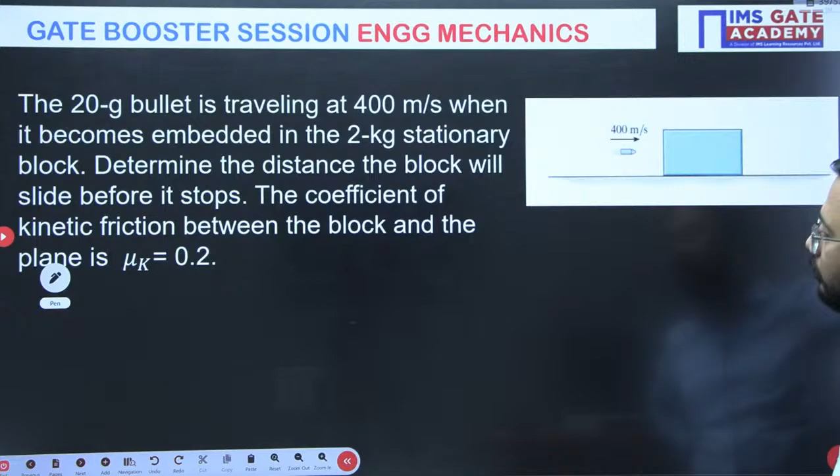Obviously it is moving with some velocity, it will have some kinetic energy. With that it will also have some velocity and move further, eventually stopping after some time. They are asking for the distance it would travel before finally coming to a stop.

Coefficient of kinetic friction they have given is 0.2. Try to solve this question. I will give you a hint here.

Apply the conservation of linear momentum principle so that you will get the velocity of the combined system when it starts moving. Conservation of linear momentum.

After that, what will you do? What is the next approach? Use Newton's second law, calculate acceleration. That acceleration will be constant.

Use V square equals to U square plus 2aS, and distance S you will be getting. If you put final velocity as 0, the initial linear velocity would be the velocity with which both the bullet and block move together. That would be the initial velocity.

Final velocity is 0. Why? Because we are saying it should stop, eventually after some distance it has traveled. During that travel, how much distance we have to calculate, that is the distance part. Final velocity would be 0, initial would be the velocity with which both are moving together.

So that is the hint. I will give you 3 minutes for this particular question as well, guys. Try to solve this one fast.

Start solving everyone, fast, this question as well.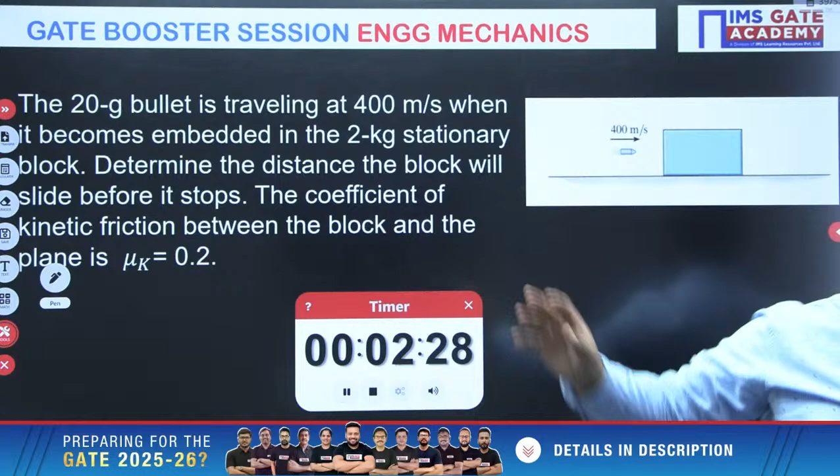Start solving everyone this question. I've already given you the hint: apply conservation of linear momentum so that you will get the velocity of the system with which it starts moving, and after that apply Newton's second law to get the acceleration, and then distance you will get the answer finally.

Last 1 minute, everyone. Ten seconds left, guys.

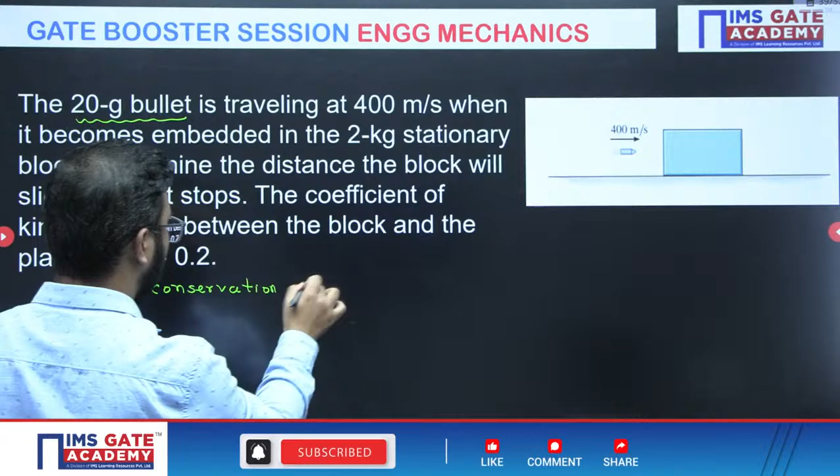Conservation of linear momentum. Mass of bullet multiplied by velocity of bullet plus mass of block (capital B for block) and velocity of the block equals mass of bullet plus mass of block into the velocity with which it will start moving together. Very important point: small b for bullet, capital B for block.

Bullet is 20 grams, so in terms of kg, 0.02, into velocity 400. It is initially stationary, the block, so velocity will be 0. Block mass they have given as 2 kg. So first I will write for bullet only: 0.02 plus 2 into velocity v. From here velocity v you will be getting as the answer.

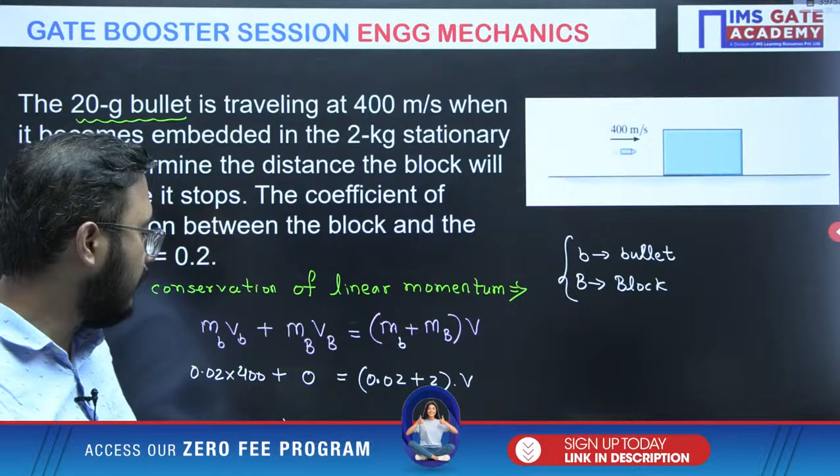That velocity is the velocity with which it will start moving together. Now second thing is apply Newton's second law.

If I draw the free body diagram here for the block, see how it would look. Weight which is mg: 2 plus 0.02 into 9.81. This is normal force, this is the friction force. Since it is moving, kinetic coefficient of friction into normal reaction will come. Now apply Newton's second law directly.

So acceleration: mu k into N equals mass into acceleration. Mu k into N, N is mg. What is m? Again 2 plus 0.02 into g, that is 9.81. Mass again 2 plus 0.02 into acceleration ax, so these terms get cancelled out. Acceleration ax will be opposite to the motion, so we use a negative sign here.

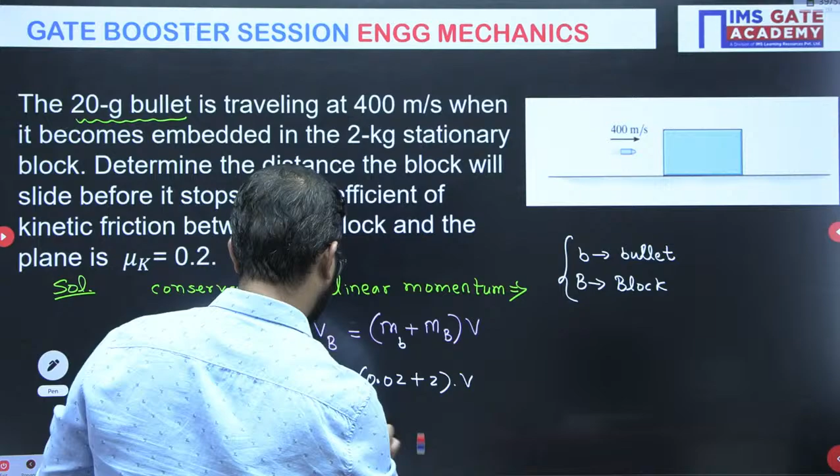Final velocity will be 0. Initially what velocity would it have? We have not calculated that, so let us calculate that part also: 0.02 into 400 divided by 0.02 plus 2, that is coming around 3.96 meter per second.

3.96 meter per second velocity, 2 into acceleration which is minus 1.962 into distance s. So you will be getting 3.96 square divided by 2 into 1.962. So approximately this much distance you will be getting just by putting all those equations: velocity 3.96, acceleration minus 1.962, like that. I hope the approach is clear.

Conservation of linear momentum, then applied Newton's second law. After applying Newton's second law, we got acceleration as constant. For constant acceleration, v square equals u square plus 2as, this equation we have applied, and from this, distance s we can easily calculate. If you have any doubt in this question, please ask in the chat box.

This is a very easy problem, you should not be facing much issue in this kind of question. Tell me, is there any doubt here? Okay, so you can solve it here. It will be coming approximately 3.99, so you can say almost equal to 4 meters. That is the answer you will be having.

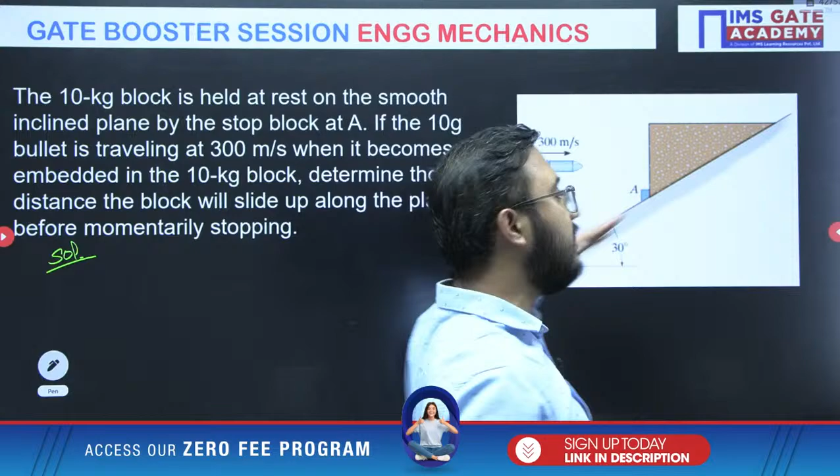So what you can do here, very basic thing again: conservation of linear momentum. While applying conservation of linear momentum, please write your equation correctly, because you have to ensure the direction it is moving along the incline, not horizontally. You have to take the velocity component along the inclined plane. Then you will get a velocity with which both bodies are moving together.

This is very, very important, because mistakes happen when we don't keep the directions correct. The formula you use correctly, but if direction is not used correctly, you will get the wrong answer. So if you apply conservation of linear momentum here: mass of bullet multiplied by velocity of bullet along the inclined plane.

Along the inclined plane you have to write, correct?

Biswajit, you have a doubt in parallel axis theorem. Tell me, what is the doubt? If you can tell me what is your doubt, then it would be much better. Otherwise, I will give you the whole explanation of the parallel axis theorem also.

Okay Biswajit, so this is the initial momentum of a bullet, initial momentum of a block, 0, because it is under stationary condition. Now both will be moving together. What is the mass? 10 kg mass plus 0.01, because 10 gram it is there, into velocity v. This is the velocity along the inclined plane you will be getting.

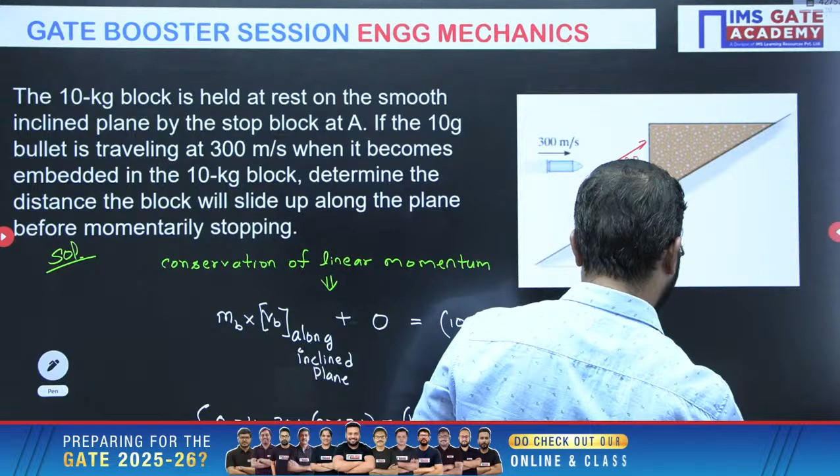Approximately, if you see, the answer would be 0.2595 meter per second. And after this, what you need to do? They are asking the distance.

They are asking the distance. You can basically apply the conservation of energy principle. Energy it would be having initially just after the impact, and when it goes to move in the inclined plane, after some moment it will stop also. At that moment, whatever energy it would have, that we have to write.

So initially, I will consider this position itself as datum. So initial potential energy 0, but kinetic energy it is having, because initial velocity with which both are moving is 0.2595. When it stopped, it has acquired the potential energy, but kinetic energy becomes 0.

So that conservation of energy principle we will be using: potential energy initial, kinetic energy initial, potential energy final, kinetic energy final. So initial potential energy 0, half mv square kinetic energy. What is mass? 10 plus 0.01 multiplied by velocity that we have calculated, 0.2595.

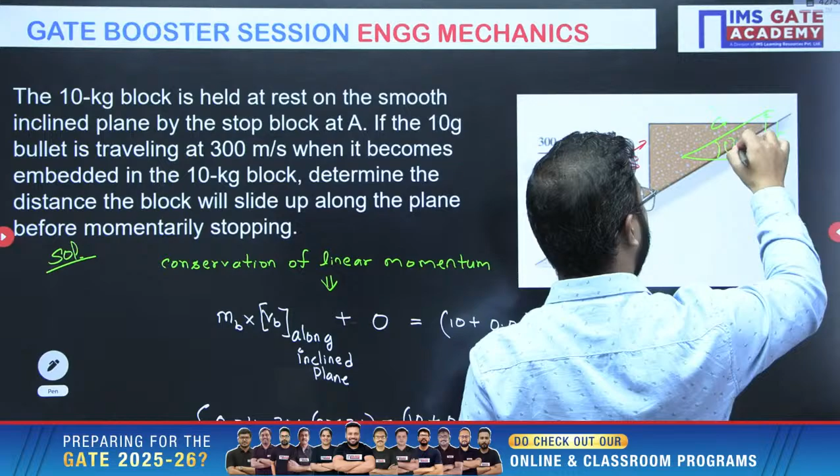We can easily calculate this, theta we already know. So sin theta is perpendicular upon hypotenuse. Perpendicular is what? H, hypotenuse is d. So distance d along the inclined plane will be h by sin theta. This is along the inclined plane, and this is vertical.

Clear? Now Biswajit, let us discuss your doubt of parallel axis theorem. We'll discuss your doubt here. As you are asking about the parallel axis theorem, please understand this application, how we can use this parallel axis theorem. Both in area moment of inertia as well as mass moment of inertia, both cases we will talk about. So that is the doubt of Biswajit.

Please see, let us consider there is a body we are having, and this is what its centroidal axis.

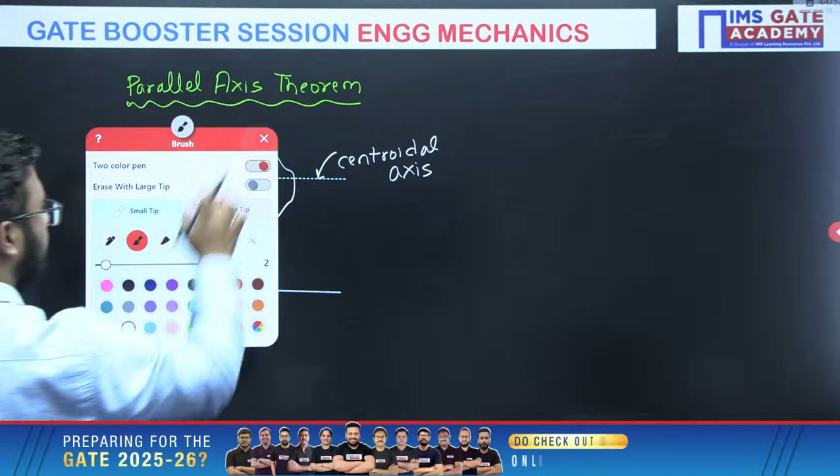This is what a centroidal axis is, any centroidal axis can be there, and this is another axis. Biswajit, please focus here, this is a very important part. There is some body having its centroidal axis, and let us suppose the area of the body is A. Distance between the centroidal axis and another axis is D.

Now if I have to write the area moment of inertia of a body about any other axis which is parallel to any centroidal axis of a body, then we can use this parallel axis theorem. And for that, what is the relation? Moment of inertia about AB equals moment of inertia about its centroidal axis plus area of the body multiplied by distance d square. This is the formula from the parallel axis theorem, where it will be used whenever you want to calculate area moment of inertia of a body about any other axis, but the condition is that the axis has to be parallel with one of the centroidal axes, and you should know the moment of inertia about that centroidal axis. Then only you will get the answer.

Biswajit, any doubt here? Let us discuss one example with you. Okay, let me discuss one example with you. Right, see.

This is the triangle we are having, and this is base B, this is height H. This is the centroid, right? Centroid distance from the base is H by 3. This is the centroidal axis, the axis passing through the centroid. Biswajit, are you able to understand this point? Okay, so centroidal axis is the axis passing through the centroid.

About the centroidal axis, area moment of inertia is BH cube by 36. If I have to calculate area moment of inertia about this base AB, what I will do is write first the area moment of inertia about the centroidal axis, BH cube by 36, plus area of the triangle, half base into height, multiplied by distance square of the centroidal axis and the axis that I have selected for writing, that is H by 3.

Biswajit, are you able to understand this part? There is a triangle, there is a centroidal axis, about the centroidal axis area moment of inertia is BH cube by 36, but I want to calculate area moment of inertia about any other axis which is parallel to the centroidal axis. So this centroidal axis is there, parallel to the centroidal AB axis I have selected.

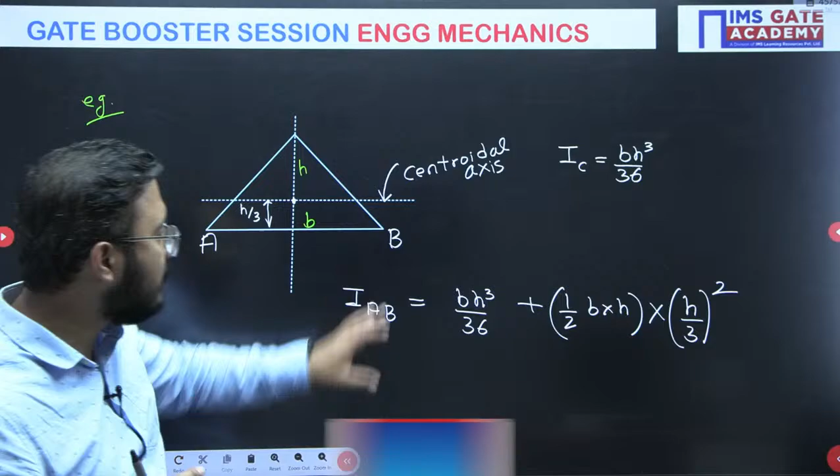I want to write area moment of inertia about AB. What I will do is first write area moment of inertia about the centroidal axis plus the area of the section, and then distance square. Which distance square? Distance from the centroidal axis to the axis you have selected for writing moment of inertia. Accordingly, you will be getting the area moment of inertia answer about any other parallel axis.

One more example. Okay, let me give you one more example here. This is the rectangle we are having. So this is dimension D, this is dimension B. This is the x-axis, this is the y-y axis, and this AB is the base.

Again, Biswajit, please try to understand here about the x-axis. What is the area moment of inertia? B d cube by 12. B d cube by 12, right? I want to calculate about AB.

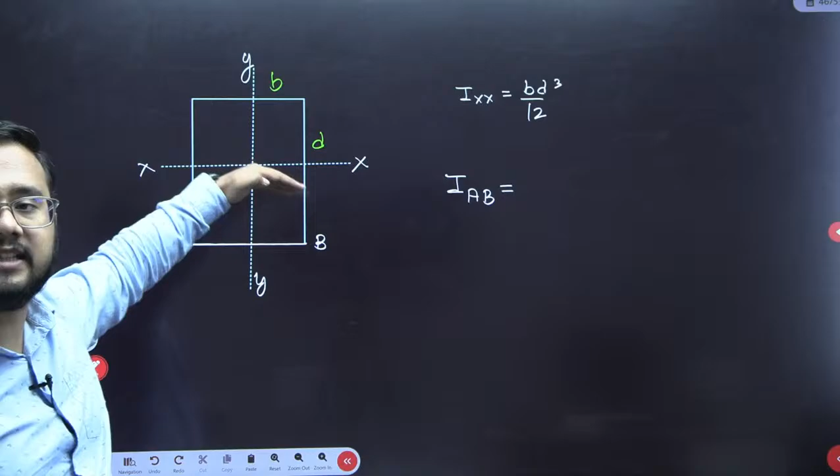So what I will do is, parallel to AB, take the x-axis, which is the centroidal axis. Parallel to the centroidal axis, about AB, I want to calculate area moment of inertia. So first, I will write area moment of inertia about centroidal plus area multiplied by distance square. Which distance square? This distance square. That distance would be half of d, that is d by 2, so we have to take d by 2 whole square as the distance here.

Centroidal moment of inertia b d cube by 12. Area b into d, and then d square by 4. Like this. Biswajit, is it clear to you? Or what is the exact issue that you are facing in this parallel axis theorem?

BD cube. Okay, one more thing, Biswajit, here you should remember how to write moment of inertia about this x-axis. Maybe you will have confusion, sometimes BD cube by 12, and for YY we have written DB cube by 12. For x-axis, which dimension will be cubed? That dimension will be cubed which is perpendicular to the x-axis. Perpendicular to x-axis, which dimension is there? D, so D cube. For writing moment of inertia about the YY axis, which dimension is perpendicular to YY? B, so B cube. Like that you should remember. Yes, Biswajit, you have written correctly, BD cube by 12, and then area also is there, na?

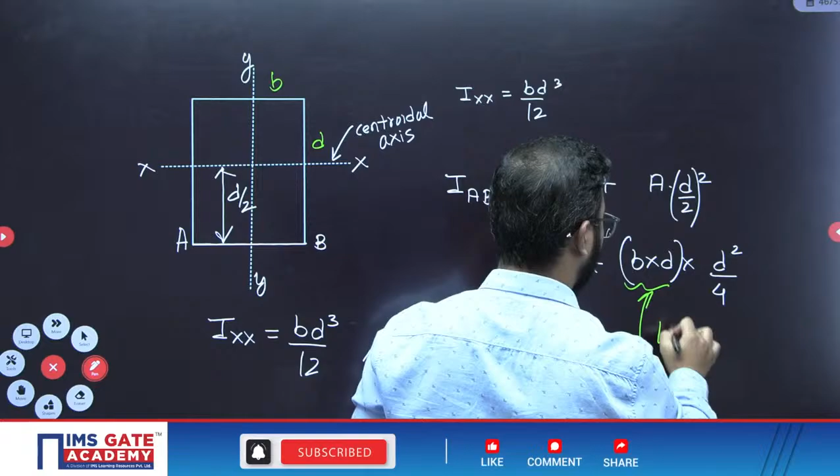Area of a body, complete body. Yes, absolutely, you have written the correct answer. Is it clear, Biswajit?

I hope the discussion that we have done on parallel axis theorem is clear to you, right? Built up section, Biswajit, that will be discussed in the strength of material section. We are discussing the concepts related to engineering mechanics. That will come in the strength of materials session, don't worry about that, right?

So today's session, whatever numericals we have discussed, these are very, very important numericals, guys. Again, I'm telling you, these are very important numericals that you have to practice again. Very important for the GATE examination, right?